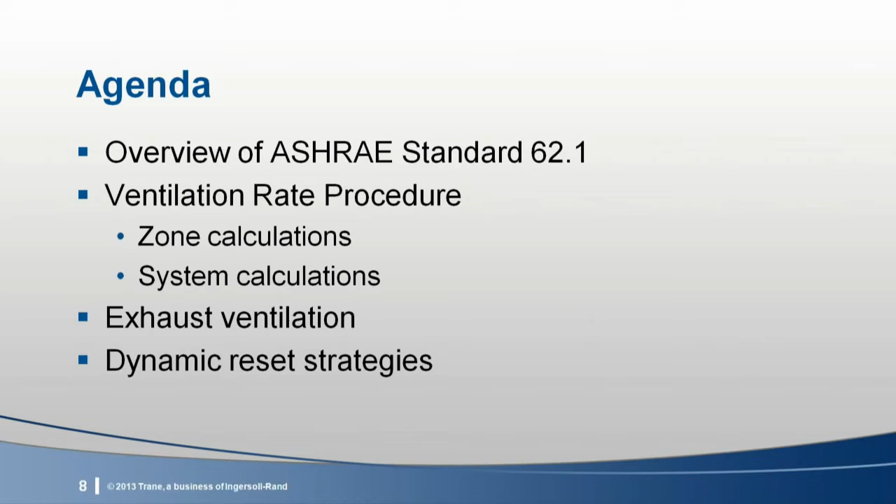During today's program, Trane Applications engineers Dennis Stanke, Paul Solberg, and John Murphy will take us through a discussion of the requirements of Standard 62.1, with specific focus on the ventilation rate procedure for calculating ventilation requirements. Dennis, who is a longtime member and recent chair of the Standard 62 Committee, will start us off with an overview of this standard. Then the guys will step us through how to use the ventilation rate procedure to determine the ventilation requirement for each zone and how much outdoor air must be brought in at the system level intake. And later, Paul and Dennis will touch on exhaust requirements and discuss various dynamic reset strategies for saving energy required to condition this ventilation air.

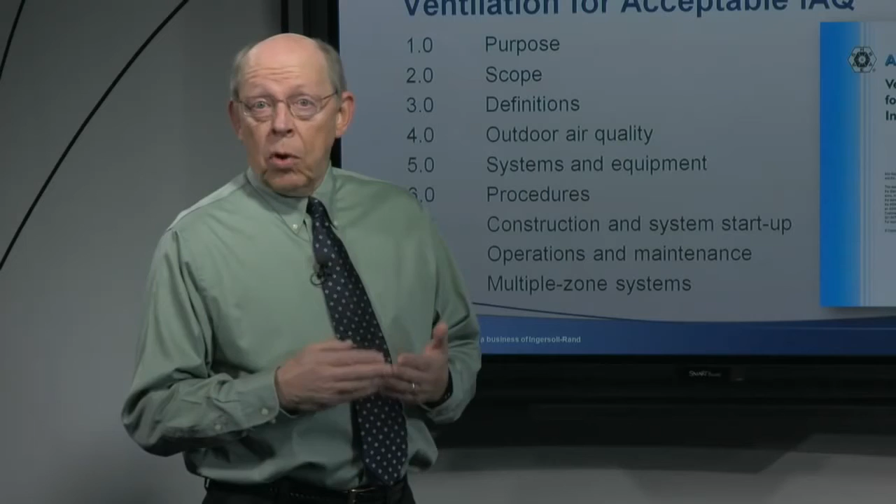Anyway, today I'm going to give you a quick overview of the 2010 version of Standard 62.1. It's a mandatory language ASHRAE design standard with the purpose of specifying minimum ventilation rates which will provide acceptable indoor air quality and minimize adverse health effects. It applies to commercial, institutional, and high-rise residential buildings, but not to healthcare.

Its requirements are organized in sections as follows: outdoor air quality assessment in Section 4, provisions for systems and equipment in Section 5, ventilation rates and calculation procedures in Section 6, construction and startup requirements in Section 7, and finally, operation and maintenance requirements in Section 8.

Normative Appendix A, which expands on Section 6 requirements, is also part of the standard. The standard is written in mandatory language so that it can be easily adopted by codes and can be used as a solid technical reference document for other standards, for energy labels, and for building rating systems.

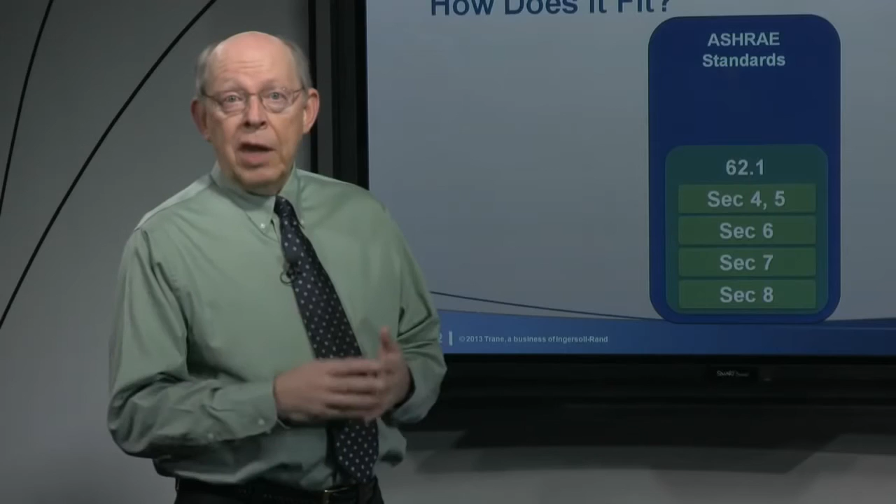This diagram attempts to show how the standard fits. First, here's Standard 62 broken down by section. Traditionally, Section 6 is most important for the model mechanical codes and many local building codes. Its ventilation rates and procedures appear in over 11,000 code jurisdictions.

To comply with ASHRAE Standard 189.1, the High Performance Building Standard, building designs must meet virtually all Standard 62 requirements. And the International Green Construction Code allows Standard 189.1 as a project compliance option. Projects following this option include all Standard 62 requirements referenced in the Standard 189.1 document.

Some building owners want to pursue a building energy label, like Energy Star or the ASHRAE Building Energy Quotient label. To comply with the Energy Star, all 62 requirements must be met. And since the ASHRAE BEQ label requires Energy Star compliance, again, all 62 requirements must be met.

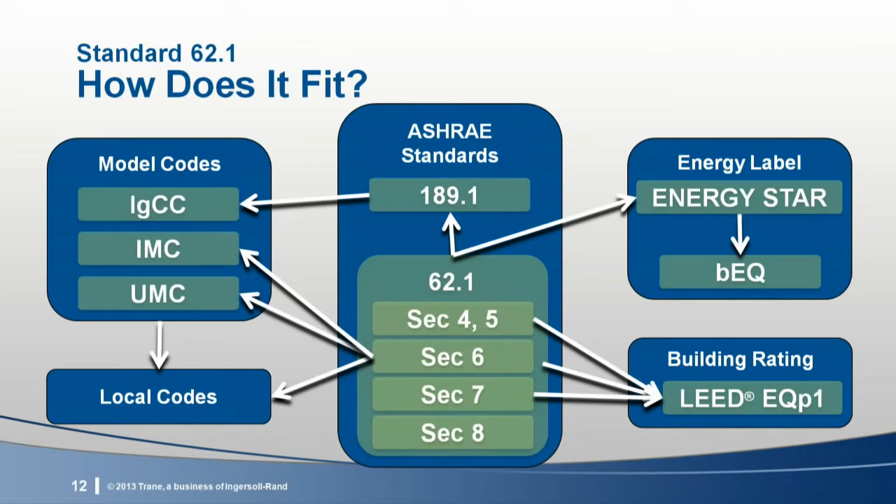And of course, many building projects these days seek LEED certification. The first LEED indoor environmental quality prerequisite requires compliance with the provisions in sections 4 through 7 of Standard 62.1. So you can see this ventilation standard provides the basis for building codes, energy labels, and building rating systems.

Okay, back to the standard to give you that quick overview that I promised.

Section 4 addresses outdoor air quality. It requires designers to consider potential outdoor contaminants both in the region and immediate vicinity of the building site. Section 5 covers a broad range of requirements for ventilation systems and equipment. When met, these requirements should help establish a baseline for building contaminant emissions so that the prescribed ventilation rates

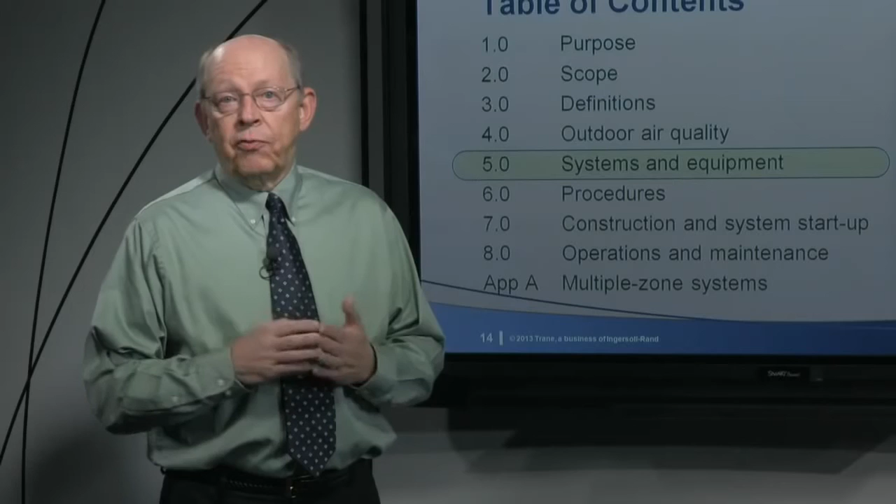and procedures in Section 6 can actually be expected to work. These sections cover a lot of ground, so we've included them in the supplemental material since we want to focus on Section 6 today. Turning now to the procedures for finding design ventilation requirements in Section 6, the standard includes 3 alternative design procedures for finding minimum outdoor airflow rates: the ventilation rate procedure, the IAQ procedure, and the natural ventilation procedure. And it includes exhaust airflow requirements in a separate section because they apply regardless of the design procedure used to determine the minimum outdoor airflow rates.

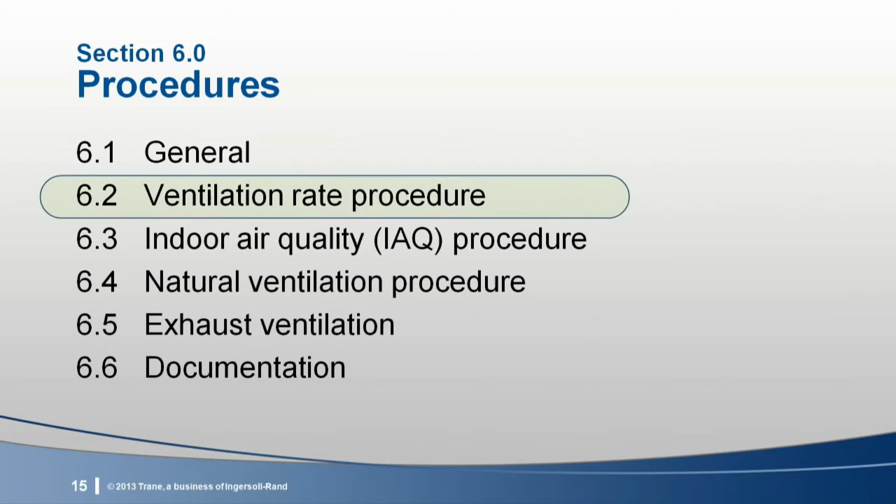The ventilation rate procedure is most widely used. It prescribes zone-level outdoor airflow rates in a table, and it prescribes equations and calculation procedures needed to find both zone and system-level rates. Most designers understand it and use it, and it's the basis for mechanical codes. Of course, it has a few tricky spots, so we'll go over an example a little bit later.

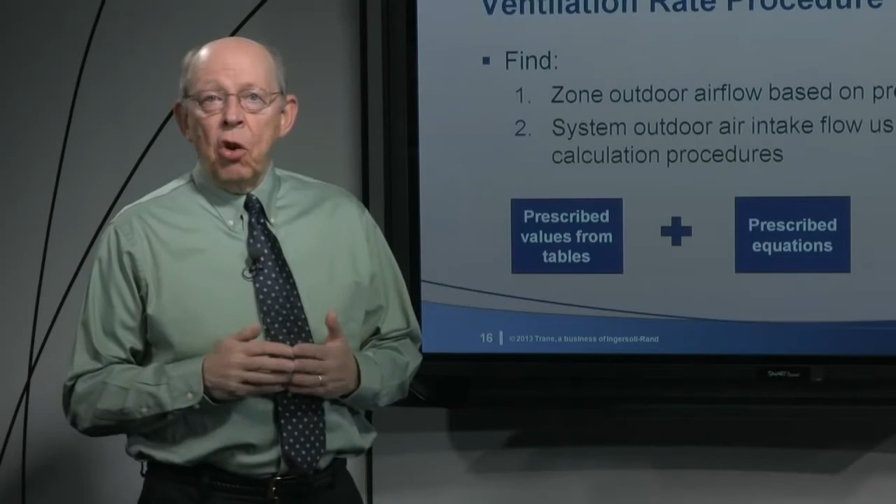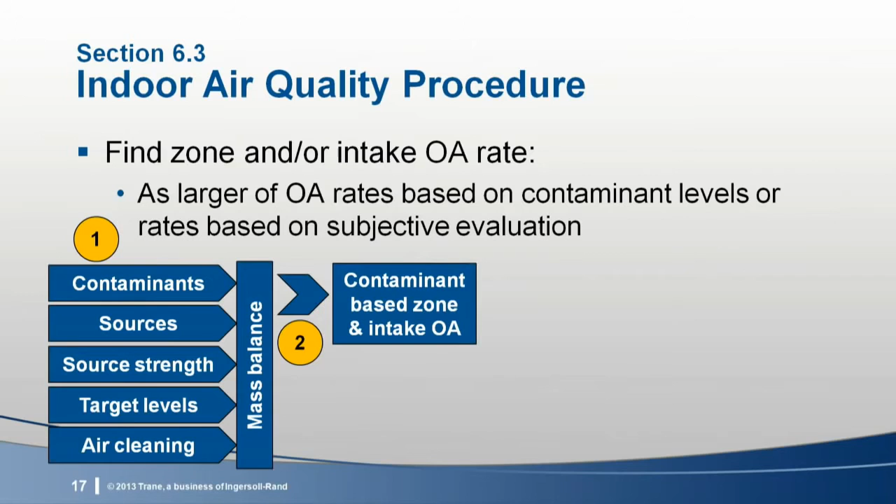Next is the indoor air quality procedure. Designers find minimum zone and system intake rates based on contaminant levels and subjective evaluation, proceeding as follows. First, identify all contaminants and mixtures of concern, sources and source strengths, and target contaminant and mixture concentrations. Second, use mass balance equations, accounting for any air cleaning devices, to find the zone and intake rates needed to

control contaminant levels to less than or equal to the target concentrations. Third, in the completed building, use a subjective evaluation in each zone to find zone and intake rates that satisfy occupants, or use the rates found by subjective evaluation in a substantially similar zone in an existing building. Finally, compare the zone and intake rates found using the mass balance approach to those found using the subjective evaluation approach, and use the larger of these rates.

Designers must perform both a mass balance analysis and a subjective evaluation to comply with the IAQ procedure. This requires a lot of work, a lot of judgment, and risk of variance from most code authorities. That's why very few one-of-a-kind building designers pursue it, why Standard 189.1 doesn't allow it, and why LEED has traditionally not allowed it. It's probably best suited for buildings with repeated identical designs, like retail chain stores.

I recently wrote an ASHRAE journal article about the IAQ procedure, showing in detail how it might be met. We included a reference to this article in the bibliography, but we're not discussing it in detail today.

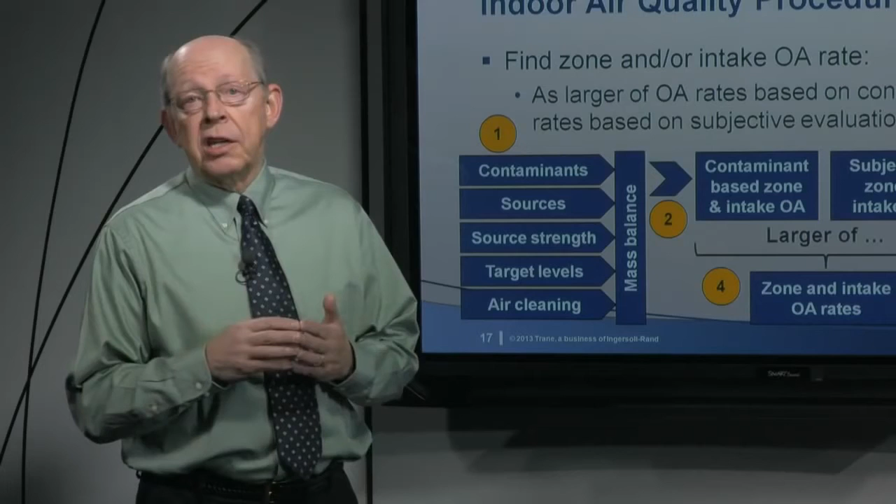Finally, the natural ventilation procedure provides for passive ventilation using only natural forces to move outdoor air through the zone. It requires that any natural ventilation system also include a mechanical system designed using either the ventilation rate procedure or the IAQ procedure. A mechanical system is needed to provide outdoor air during those times when the local openings must be closed.

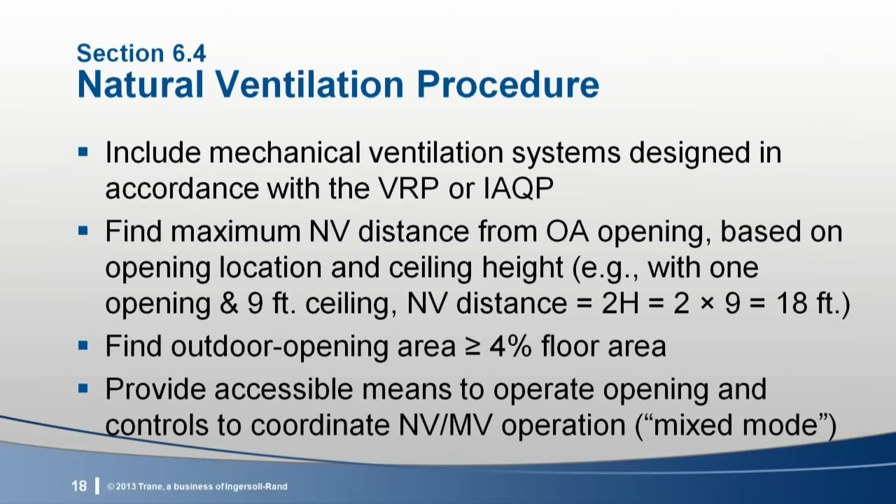To comply, first find how far outdoor air can be expected to penetrate into the occupied zone. This depends on the location of openings and the ceiling height. Next, find the area of the outdoor opening. It must be no less than 4% of the naturally ventilated floor area. Finally, provide readily accessible means for occupants to adjust the outdoor openings and provide controls to coordinate the operation of natural and mechanical ventilation systems.

Mixed mode ventilation is required because virtually all naturally ventilated buildings need mechanical ventilation at some point. For example, occupants may close local openings due to rain, wind, heat, cold, outdoor pollution, outdoor noise, and so on. As with the IAQ procedure, we're not discussing the natural ventilation procedure in any detail today.

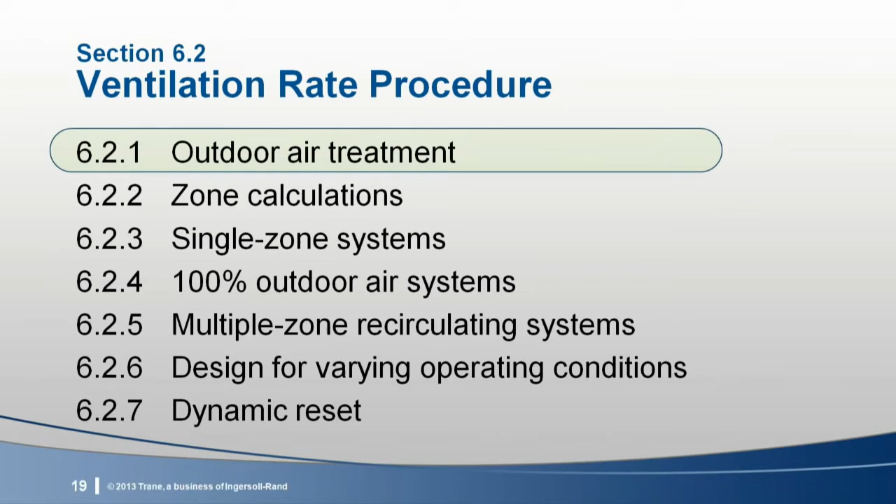Today, we're focused on the ventilation rate procedure. It covers outdoor air treatment, zone level and system level outdoor airflow calculations, an optional averaging approach to design for varying operating conditions, and an optional control approach to reset outdoor airflow dynamically.

Before we turn our attention to ventilation calculations, however, I want to briefly discuss outdoor air treatment. We use outdoor air to dilute and remove indoor contaminants. But since outdoor air itself can contain contaminants, in some geographical locations, the standard requires outdoor air cleaning between the intake and the occupied zone. The ventilation rate procedure requires filters in PM10 non-attainment areas, those areas where the concentration of particulate matter, 10 microns and smaller, exceeds the National Ambient Air Quality Standard.

Here's the latest EPA map for PM10 non-attainment areas. At least MERV 6 filters are required for buildings in all shaded locations shown in both yellow and red.

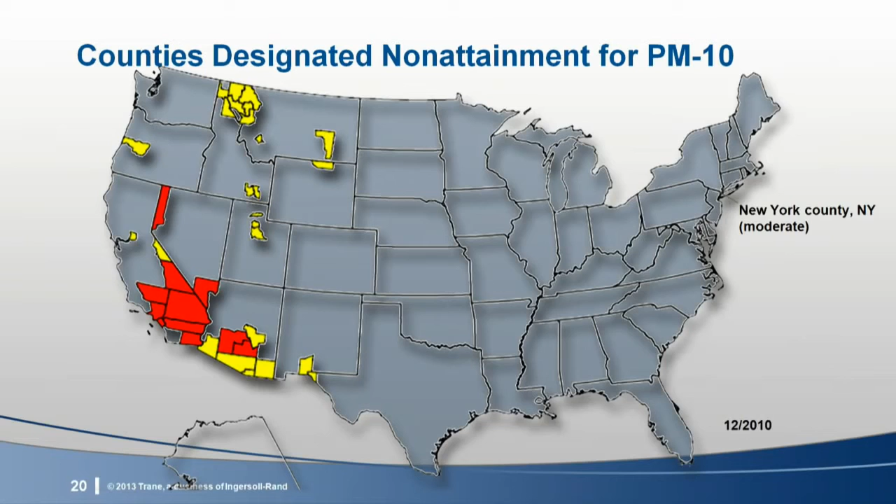This shouldn't be a big problem since the air handler probably has a cooling coil with a wet surface, and Section 5 already requires a MERV 6 filter upstream of any wet surface device.

At least MERV 11 filters are required for systems in the shaded locations. Air handler fans must be selected to provide the required airflow whether the filter is clean or dirty.

According to Appendix E, only buildings in Riverside, Kern, Los Angeles, and San Bernardino County in California need ozone air cleaners. But these designations change, so designers should check the EPA 8-hour ozone status for any planned building site.

Buildings located in ozone non-attainment areas other than Southern California don't need air cleaners to meet Standard 62, but designers might want to consider using them anyway.

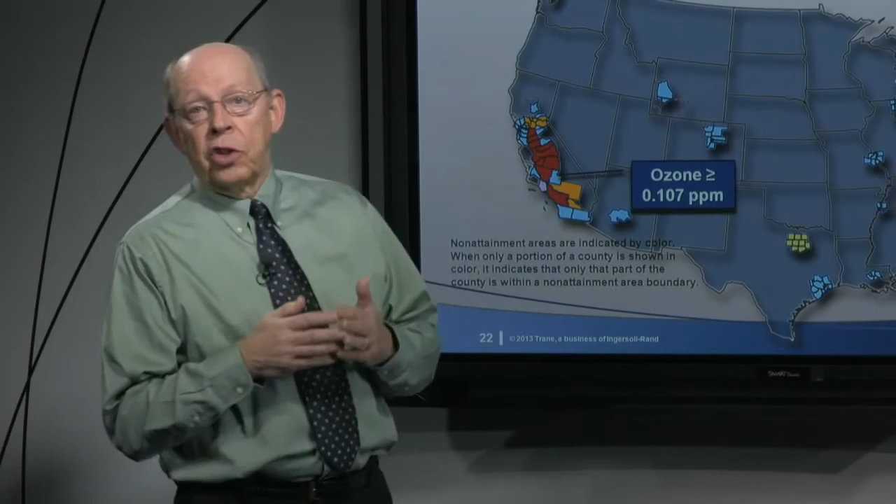After all, breathing ozone is harmful, and besides that, if you're designing a high-performance building, Standard 189.1 requires 40% efficient ozone air cleaners in all ozone non-attainment areas, which includes most of California and many major metropolitan areas throughout the U.S. As Dennis mentioned, we're only going to focus on the ventilation rate procedure for today's program.

This procedure includes both zone calculations and system calculations. First, the outdoor airflow needed in each ventilation zone must be determined based on prescribed rates listed in a table. Then, based on these zone calculations, the outdoor airflow needed at the intake for the entire system must be calculated, using procedures and equations defined in the standard.

Paul is going to start out by explaining the zone calculations. Standard 62 requires a three-step procedure to determine the outdoor airflow required for any occupiable space, which the standard calls a ventilation zone. I'll tell you about those 3 steps and then dive deeper into each one.

First, we calculate the volume flow of outdoor air, V sub BZ, that must be delivered to the breathing zone within an occupied space, using the prescribed rate in Table 6-1 of the standard.

Next, we determine the zone air distribution effectiveness, or how well the ventilation air mixes in the space, which depends on the location of the supply diffusers and return grills. The standard provides default values in Table 6-2 for different air delivery configurations.

Finally, we calculate the volume flow of outdoor air required for the zone by dividing the breathing zone outdoor airflow by the air distribution effectiveness.

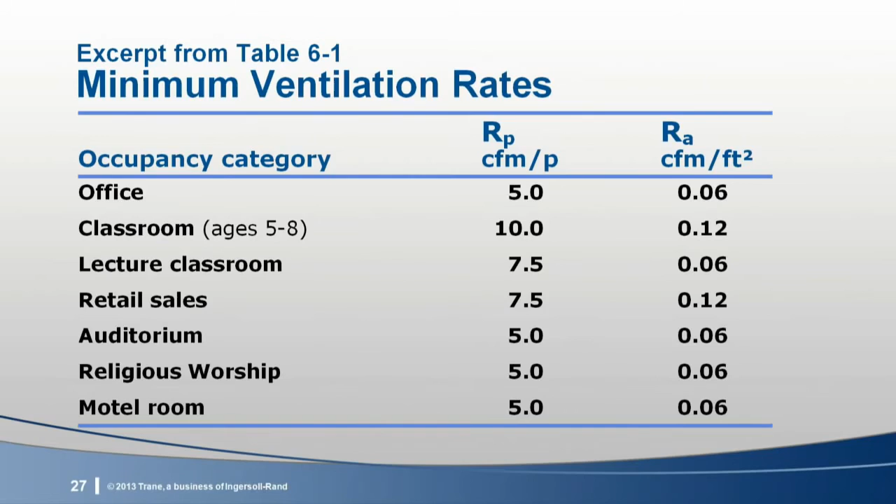Earlier versions of this standard prescribed only 1 ventilation rate for each category. This single rate accounted for the additive nature of odors and irritants, but did so behind the scenes. For example, the 1989 version of the standard required 20 CFM per person for offices. Behind the scenes, that was 15 CFM to dilute people-related odors and an additional 5 CFM to dilute building-related odors.

But these old CFM per person rates penalized high occupant density zones, like conference rooms or theaters and churches. By accounting for people-related and building-related sources separately, the new approach, which some call additivity, results in lower ventilation rates for high-density spaces. Now back to our 3 steps necessary to determine the volume flow of outdoor air for a zone.

Let's exercise the first of these 3 steps for zone calculations by using a simple example. In step 1, we determine the occupancy category for the zone using Table 6-1 and identify the corresponding ventilation rates.

This includes 2 components. First, the people source outdoor airflow rate, called R sub P, quantified in terms of CFM per person. Second, the building source outdoor airflow rate, called R sub A, quantified in terms of CFM per square foot. Then we determine the peak population for the zone, P sub Z, and floor area, A sub Z, and solve this equation to find the required outdoor airflow for the breathing zone.

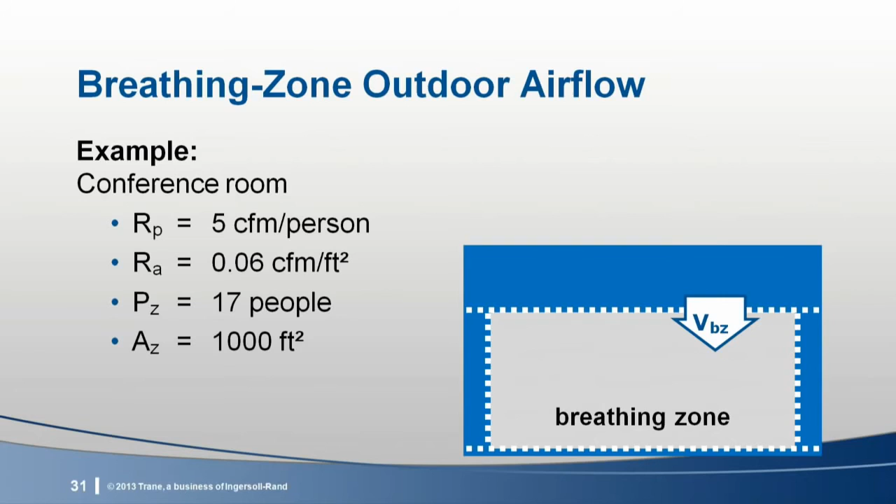Let's look at one example. Again, 1,000 square foot zone, but this time it's a conference room designed for 17 people. The Table 6-1 requirements are the same for a conference room as they are for an office in our previous example: 5 CFM per person plus 0.06 CFM per square foot.

When we solve the equation, predictably, the conference room needs the same 60 CFM outdoor air as the office space to dilute the building-related sources. But it needs 85 CFM to dilute the people-related sources due to the higher occupancy. In total, the conference room requires 145 CFM of outdoor air compared to 85 CFM for the office.

Okay, back to the three-step zone calculation process. Using the prescribed rates in Table 6-1, we just used equation number 1 to determine the volume flow of outdoor air that must be delivered to the breathing zone.

We now move to step 2, the determination of the effectiveness of the zone air distribution, E sub z, which is based on how the air is delivered to the space. E sub z helps the designer account for ventilation air that is delivered to the space by the diffusers, but bypasses the actual breathing zone.

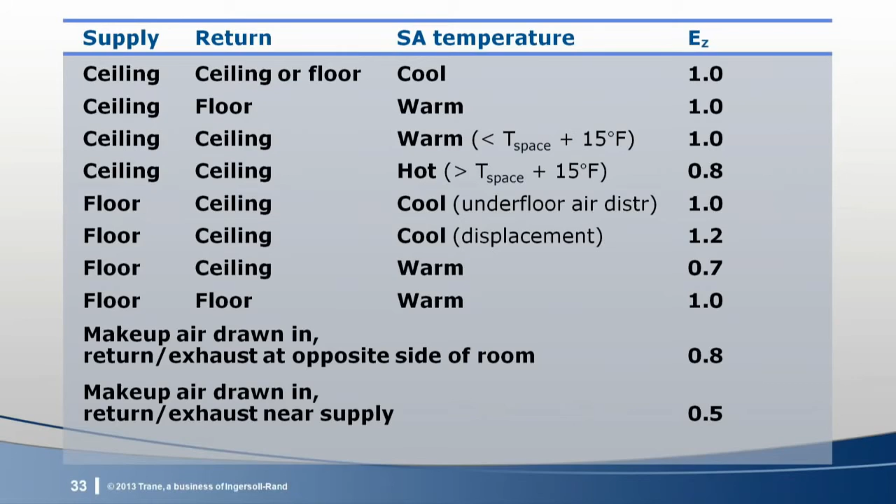During heating operation, it may be less than 1, since warm air tends to float above the breathing zone air or rise quickly through it. In either heating design, the air doesn't perfectly mix in the breathing zone, and therefore doesn't do a good job of diluting contaminants.

Now that we know both the volume flow of outdoor air to the breathing zone and the effectiveness of the air delivery system, we can calculate the volume flow of air that must be delivered to the space. V sub OZ is simply the required flow to the breathing zone divided by the effectiveness of its delivery. Going back to our office example, the outdoor airflow that must be delivered to the breathing zone is 85 CFM.

During the cooling mode, cool air enters the space through the overhead diffusers and returns through grills in the ceiling. From Table 6-2, we find the zone air distribution effectiveness to be 1. This means that delivering cool air from overhead diffusers is 100% effective at getting the outdoor air into the actual breathing zone. So solving the equation, we find that 85 CFM of outdoor air must be delivered to the diffusers so that 85 CFM makes it into the breathing zone. No air bypasses in this mode.

But what about during heating mode? If hot air enters the space through the same overhead diffusers and exits from overhead grills, Table 6-2 indicates that the zone air distribution effectiveness is only 0.8. When supplied and returned overhead, the buoyancy of this hot air will tend to cause some of the air to bypass from the diffusers to the ceiling-mounted return grills. So this system configuration is less than 100% effective at delivering outdoor air from the diffusers to the breathing zones. In the heating mode, we find that 106 CFM of outdoor air must be delivered to the overhead diffusers so that 85 CFM makes it into the breathing zone in this office.

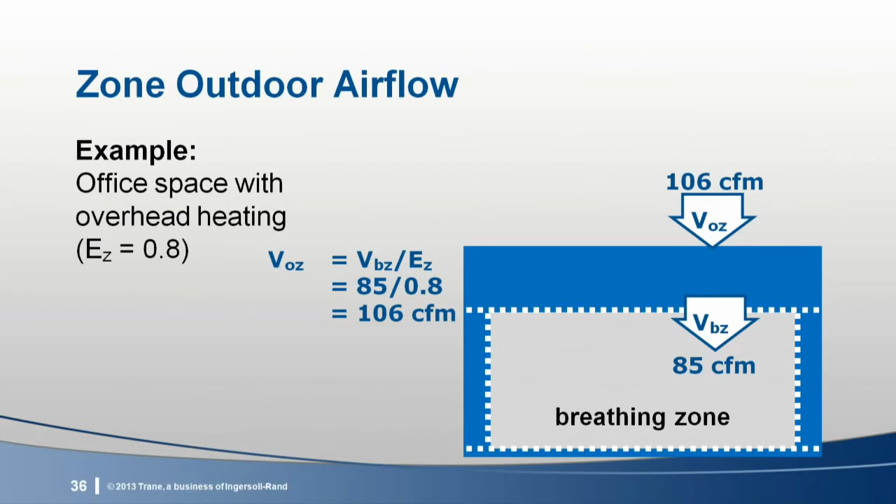In this mode, 21 CFM of outdoor air bypasses the breathing zone altogether. This next slide compares the various methods of distributing air to the zone and how the default values for air distribution effectiveness impact zone outdoor airflows for our office example.

First, notice that E sub z for most common configurations is 1. Two configurations that have an effectiveness less than 1 are when hot air is delivered through ceiling-mounted diffusers and it also returns from the ceiling, or when warm air is delivered through diffusers in or near the floor and it returns from the ceiling.

However, notice that if you design the system so that the supply air temperature during heating is less than 15 degrees above the space temperature, and if the diffusers are selected to achieve suitable velocities, you can achieve an air distribution effectiveness of 1, even with overhead heating. This should be the design goal.

The only configuration that has an effectiveness greater than 1 is when you deliver cool air using true displacement ventilation.

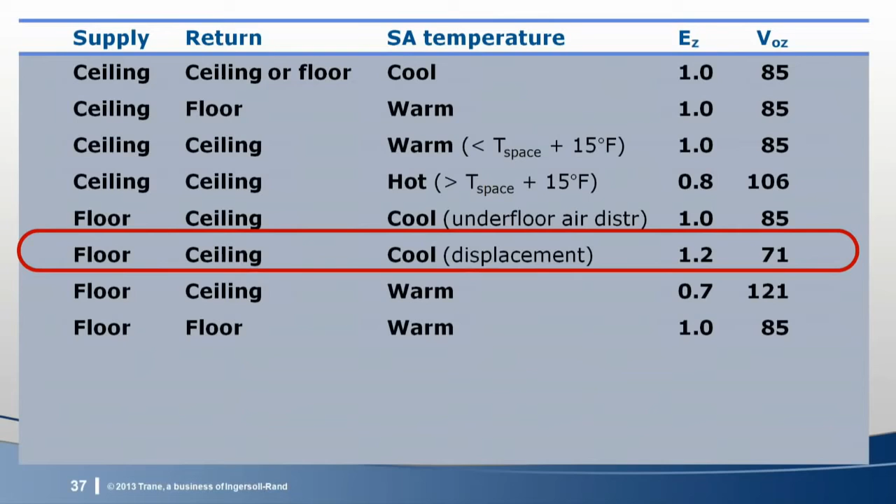Finally, these last two configurations were added to address systems where the outdoor air is drawn into the room. A common example is a hotel in which the outdoor air is delivered to the corridor and then drawn into the individual guest rooms underneath the door.

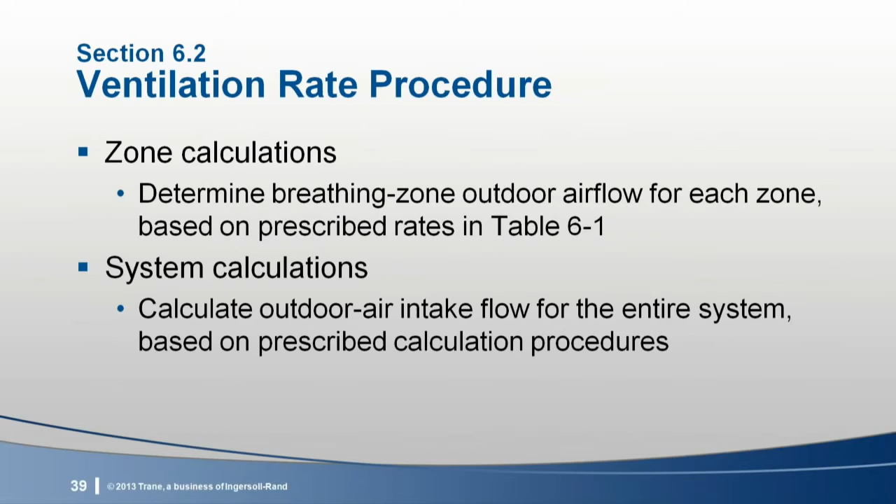So that covers the zone calculations of the ventilation rate procedure. Next, John will explain the system calculations. This involves calculating the outdoor airflow needed at the intake for the entire system and builds on the zone calculations we just reviewed.

John: The ventilation rate procedure of Standard 62 defines 3 ventilation system configurations: single zone, 100% outdoor air, and multiple zone recirculating systems. The procedure for calculating the system-level outdoor air intake flow differs for each of the configurations. But in each case, the system calculations build on the same zone calculations that Paul just explained.

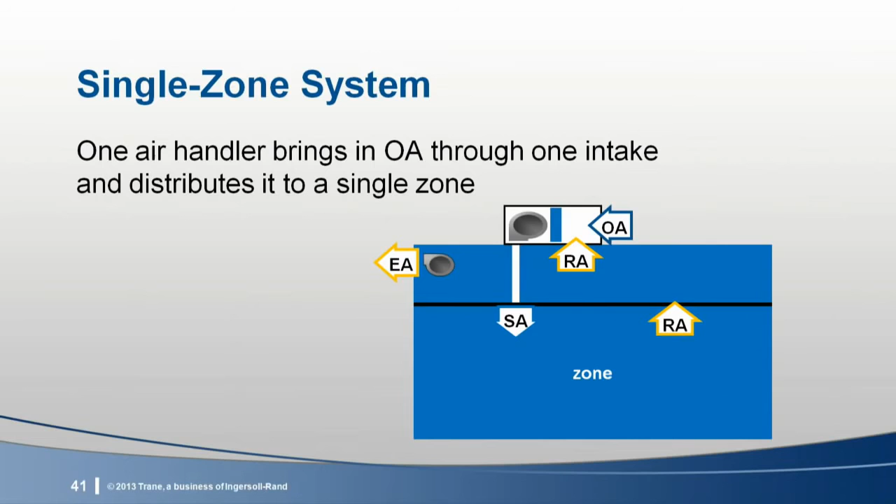In a single zone system, one air handler serves the ventilation needs of one zone. All the outdoor air that enters through the intake is delivered to that single zone. Any recirculated air is merely return air from that same zone. Some examples of single zone systems include packaged terminal air conditioners, classroom unit ventilators, or small packaged rooftops.

In a 100% or dedicated outdoor air system, one air handler serves the ventilation needs of more than one zone. Outdoor air enters through the intake and is then delivered to the zones without mixing it with any recirculated air. That is, the dedicated outdoor air unit delivers only outdoor air, not a mixture of outdoor air and recirculated air. Local units then handle the cooling or heating loads within each zone. These local units are typically fan coils, water source heat pumps, small DX split systems, or VRF terminals. Or they might be small rooftop units, chilled beams, or even radiant ceiling panels.

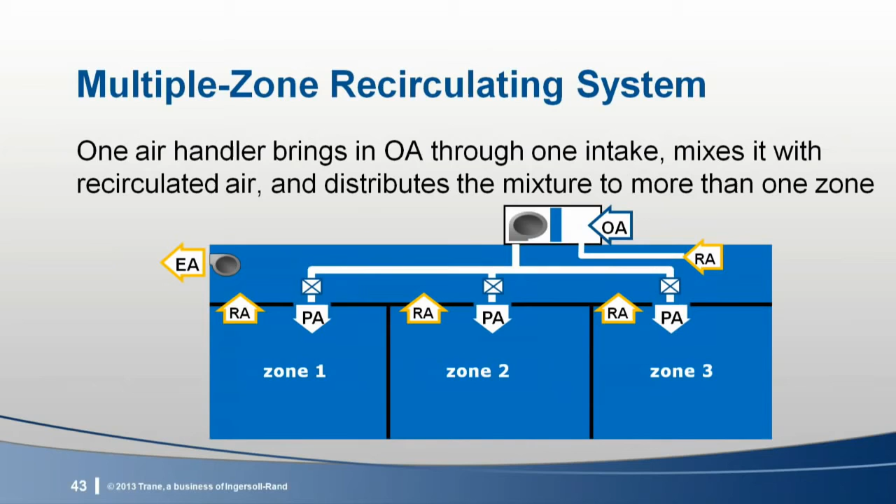In a multiple zone recirculating system, one air handler serves the ventilation needs of more than one zone. But in this case, after the outdoor air enters through the intake, it mixes with recirculated air before being delivered to the zones. The most common example is a conventional multiple zone VAV system. Also, for some applications, active chilled beams may require primary airflow that is greater than the minimum ventilation requirement. In that case, if they recirculate air, they are also multiple zone recirculating systems.

To demonstrate the procedures for calculating system level intake flow, we'll use this very simple 3-zone example. As I mentioned, for each of the 3 configurations, the system calculations build off of the exact same zone calculations. So for our example, the zone outdoor airflows have already been calculated to be 300 CFM for zone 1, 400 CFM for zone 2, and 500 CFM for zone 3.

We'll demonstrate the system calculations assuming operation in cooling mode, so zone air distribution effectiveness is equal to 1 in each zone. But I will mention how the results might change in the heating mode later on.

Now, starting with a single zone system. Since all the outdoor air enters through a single intake and is then delivered to one zone, this calculation is pretty easy. For our example, we're assuming that a separate rooftop unit serves each of the 3 zones. According to Standard 62, the required system intake flow, V sub OT, is equal to the corresponding zone outdoor airflow, V sub OZ.

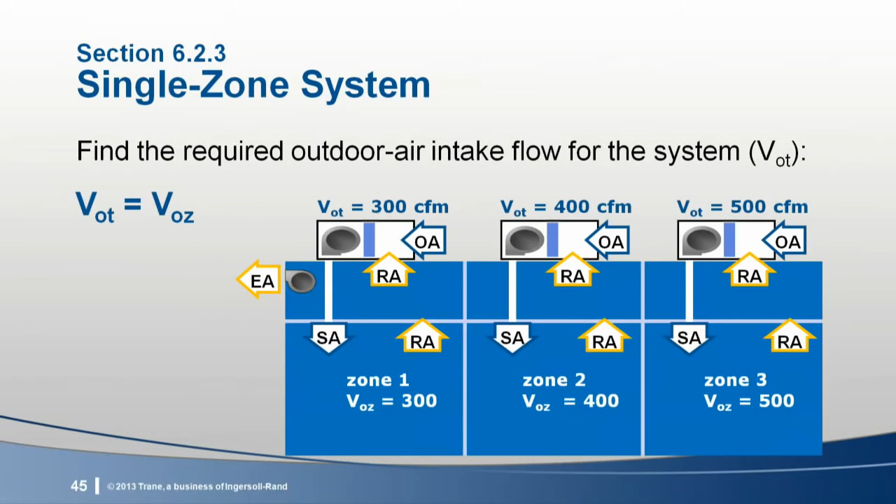So V sub OT equals 300 CFM in the cooling mode for the system serving zone 1, 400 CFM for the rooftop serving zone 2, and 500 CFM for zone 3.

Note that if E sub Z is less than 1 during heating mode, the system intake in a single zone system may need to be higher.

Now let's move on to the 100% outdoor air system. For our example, we're assuming that a dedicated outdoor air unit delivers conditioned outdoor air directly to all 3 zones, and a fan coil in each zone provides heating or cooling.

In this case, since the ventilation system delivers only outdoor air and no recirculated air, the required system intake flow, V sub OT, is simply the sum of the zone outdoor air flows. So for our example, the intake for this dedicated outdoor air unit needs to be 1200 CFM, or 300 plus 400 plus 500.

Now for the multiple zone recirculating system, which is more challenging. For our example, we're assuming that one VAV air handler serves all 3 zones, and each zone has a VAV box to vary the cooling or heating.

The primary air leaving the air handler is a mixture of outdoor air and air that has been recirculated from the zones. All zones receive the same fraction or percentage of outdoor air. As a result, while the critical zone, that is the zone that requires the highest percentage of outdoor air, is properly ventilated, the other zones served by the system are overventilated.

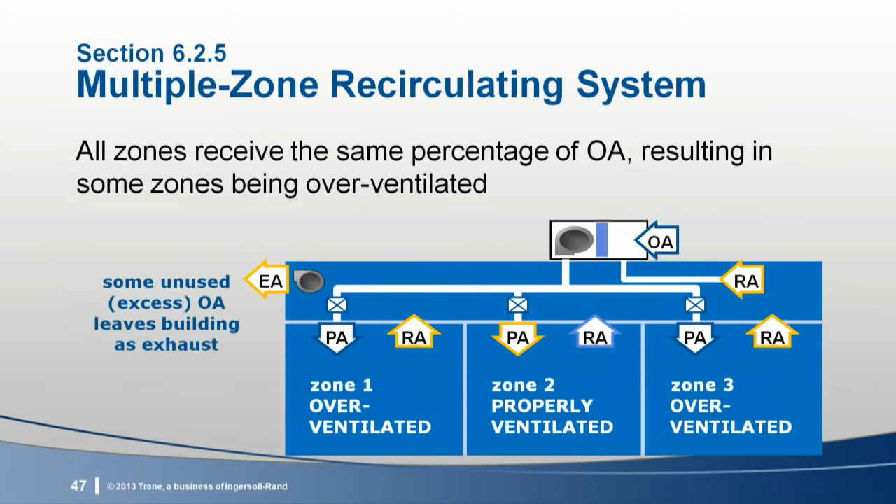In other words, some outdoor air enters the system intake, passes through these non-critical zones, then leaves the building without using up its full diluting potential. Some of the outdoor air brought into the system is wasted because of overventilation in non-critical zones.

To account for this, Standard 62 requires the designer to determine the system ventilation efficiency, or E sub V, in order to calculate the intake airflow for this type of system.

The ventilation rate procedure includes 2 methods for determining E sub V. You can either use the default value provided in Table 6-3, or you can calculate it using the procedures outlined in Appendix A of the standard.

The default approach is pretty simple, so it takes less time. However, the calculated approach is more accurate and often results in a higher efficiency and lower intake flow, so it may be worth the effort.

The first step is to calculate each zone's outdoor air fraction. Second, we find the uncorrected outdoor air intake, followed by the third step of determining the system ventilation efficiency. And finally, the fourth step, we calculate the required system outdoor air intake flow, V sub OT.

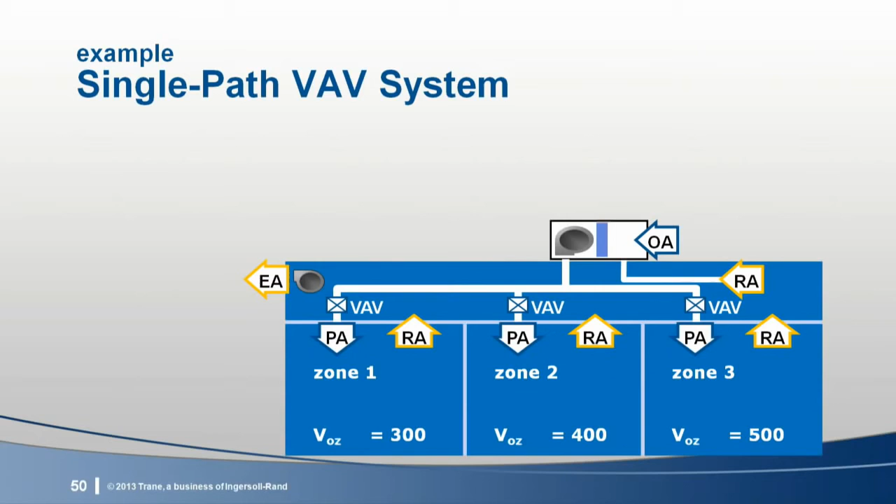This system includes a central air handler or rooftop unit that mixes outdoor air with recirculated air, and then delivers this primary air to individual single-duct VAV boxes. These boxes vary the airflow delivered to each zone.

As a precautionary note, we want to emphasize that this example is not intended to reflect a real-life system. Our purpose here is to demonstrate the calculation methods, so we tried to make the numbers simple rather than realistic. Your bibliography lists a series of articles that Dennis wrote for the ASHRAE Journal. They go through these calculation procedures in detail using a more realistic example.

So the first step is to calculate the fraction of outdoor air required in the primary air delivered to each zone. This is called the zone outdoor air fraction, or Z sub PZ. This is the ratio of zone outdoor airflow required to the primary airflow delivered to the zone. The larger the ratio, the richer the concentration of outdoor air required to meet the zone's ventilation demand.

In a VAV system, the primary airflow changes as the space load changes. So this fraction is higher when zone primary airflow is lower.

Standard 62 comments on this by stating that for VAV systems, you should use the lowest primary airflow that's expected to occur at the design condition being analyzed. The most conservative approach would be to use the minimum airflow setting of the VAV box, which results in the highest outdoor air fraction. But the standard allows you to use a higher airflow than this minimum setting, if that's what you expect in the zone at the design condition, and that would benefit by resulting in a lower fraction.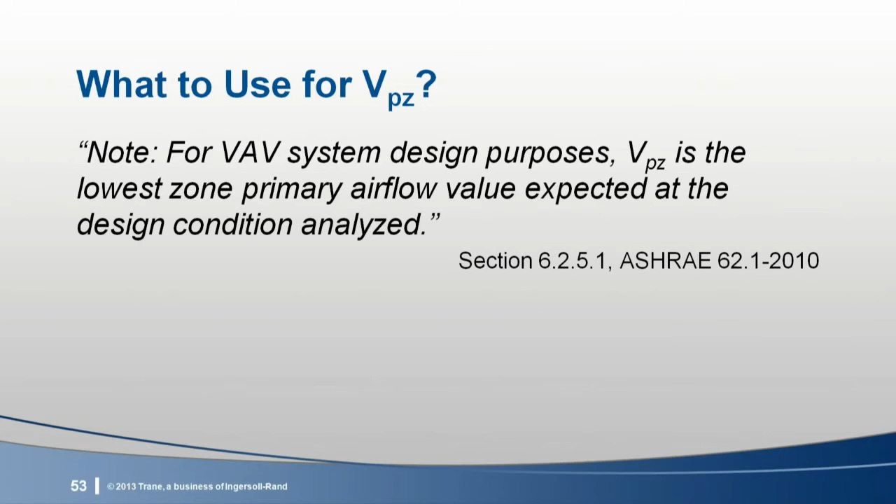Back in 2008, Dennis, Mick Schwedler, and Steve Taylor of Taylor Engineering presented an E&L broadcast that discussed how Standards 62 and 90.1 impact the design and control of VAV systems. On that broadcast, Steve shared his process for determining the minimum expected primary airflow when calculating a zone outdoor air fraction. We're not going to repeat that discussion today, but that E&L is listed in your bibliography and can be viewed online if you want to revisit that subject.

For the purpose of today's simple example, we'll just take the most conservative approach and use the minimum airflow setting of the VAV box. For Zone 1, the design primary airflow is 2,600 CFM, and the minimum primary airflow setting is 650 CFM. So the worst case outdoor air fraction from Zone 1 is 0.46, that's 300 CFM of outdoor air divided by 650 CFM of primary air. Solving for the other zones, we find that the outdoor air fractions vary from 0.46 to 0.5 for this example system.

With the zone outdoor air fractions calculated, the second step is to determine the uncorrected outdoor air intake. This is the system intake airflow that would be required if ventilation efficiency was 100%, and it's the amount of outdoor air that actually gets used in the breathing zones. Notice that this equation is basically the sum of the breathing zone rates that Paul described, with the exception of this factor D. The D stands for occupant diversity.

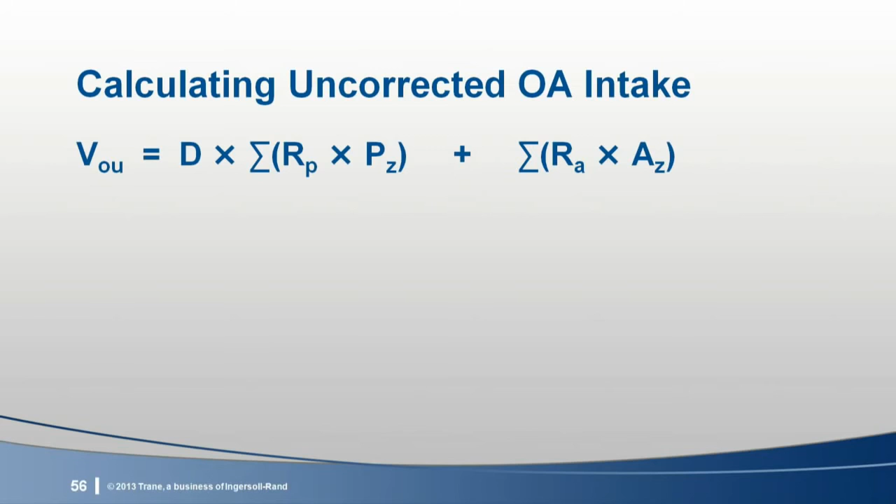For any system that serves multiple zones, we know that all zones won't usually be simultaneously occupied at their design populations. For example, if all the workspaces in an office building are fully occupied, the conference rooms will be empty. This diversity can be accounted for when designing the ventilation system. Mathematically, occupant diversity is the ratio of the expected peak system population divided by the sum of the peak populations in all the zones served by this system. Note that this diversity value is multiplied by only the CFM per person component of the ventilation rate, R sub P, not the CFM per square foot component.

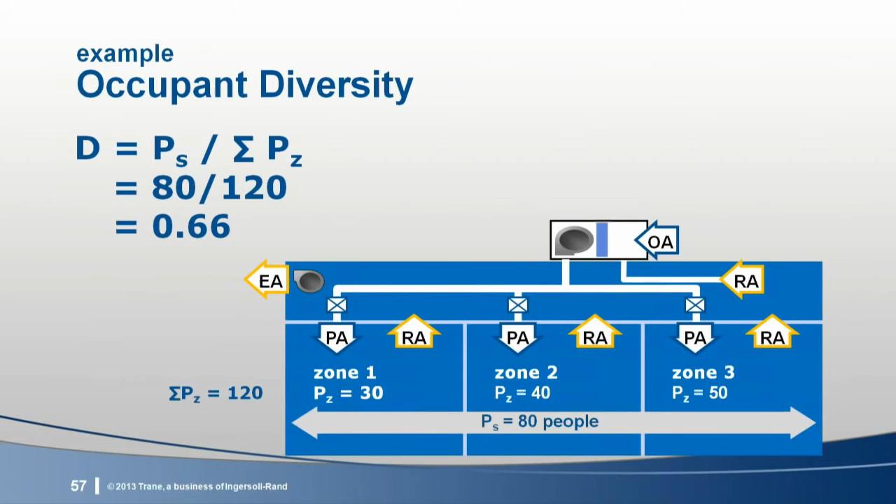So calculating occupant diversity for our example, the peak population for Zone 1 is 30 people, 40 people for Zone 2, and 50 people for Zone 3. So the sum of these peak zone populations is 120. Based on the expected peak population of 80 people for the overall building, the occupant diversity factor is 0.66.

With diversity calculated, next we'll sum the breathing zone rates. The people-related component of the breathing zone airflow is the CFM per person rate times the peak zone population. The sum of these three zones is 600 CFM, but again that portion is reduced by multiplying by occupant diversity. The building-related component is the CFM per square foot rate times the floor area. The sum for these three zones is also 600 CFM, but again this is not affected by occupant diversity. Adding these two components together, the uncorrected outdoor air intake is 1,000 CFM for our example.

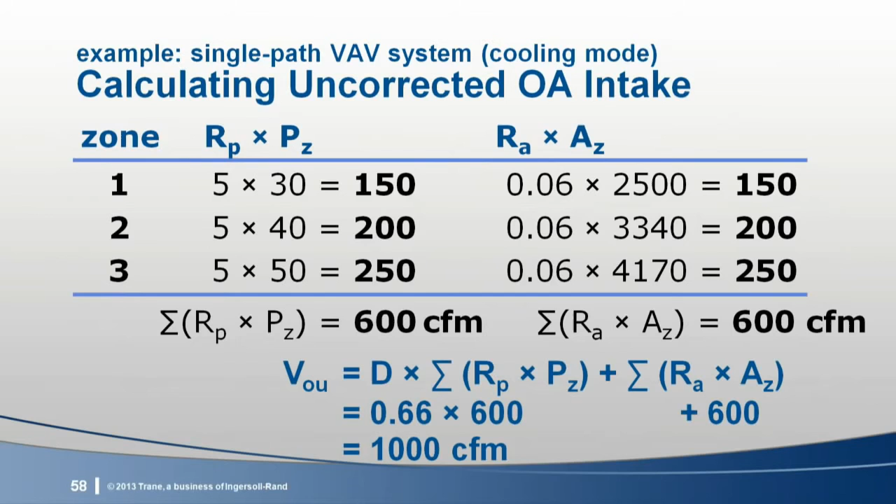So far we've calculated the zone fractions and the uncorrected intake. The third step is to determine the system ventilation efficiency. As I mentioned, you can either use the default value provided in Table 6-3 or calculate it using Appendix A. We'll start by walking through the calculation procedure from the appendix, then later we'll compare those results to the default method using this table.

Calculating system ventilation efficiency is a three-step process. First, we determine the average fraction of outdoor air in the system, or X sub S. This is the uncorrected outdoor air intake we just calculated, divided by the total system primary airflow. Then we calculate a ventilation efficiency for each zone. For systems with a single recirculation air path, calculating zone ventilation efficiency is fairly simple. For those systems with a secondary recirculation path, more assumptions and calculations are involved. But once the zone ventilation efficiencies are known, the final step of determining system ventilation efficiency is easy—it's simply equal to the smallest zone ventilation efficiency.

For step 3A, to calculate the average outdoor air fraction, we need to know the total system primary airflow, or V sub PS. Appendix A defines system primary airflow as the sum of the zone primary airflows. However, for a VAV system, the maximum airflow delivered by the supply fan, often called the block airflow, is less than the sum of the peak zone airflows because of load diversity. This block airflow can be obtained from load calculation software or by assuming some load diversity factor.

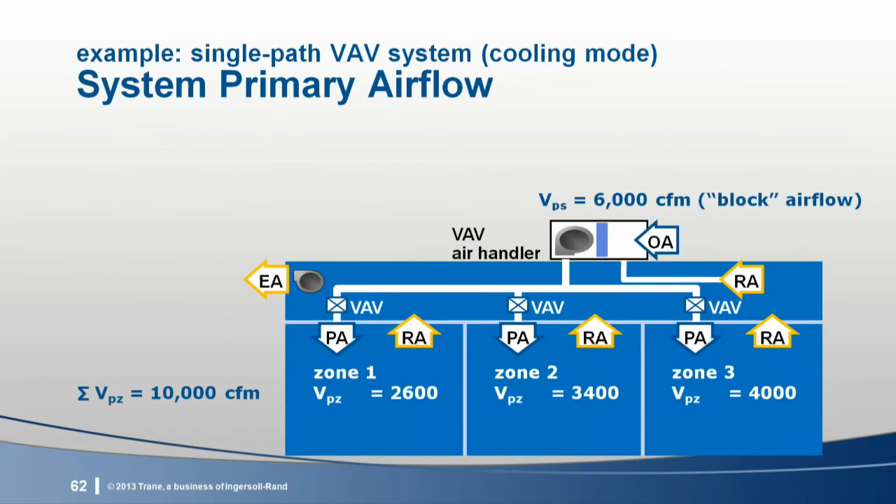However, the software also calculated the block airflow for the system to be only 6,000 CFM, again due to load diversity. To complete step 3A and find the average outdoor air fraction for the system, we divide the uncorrected intake, which we calculated to be 1,000 CFM, by the total primary airflow for the system, which is 6,000 CFM. So X sub S is equal to 0.17.

Step 3B is to calculate ventilation efficiency for each zone. This represents how efficiently the system delivers outdoor air from the system level intake to each individual breathing zone. As I mentioned, this calculation is simple for systems with a single recirculation air path, but more involved for systems with a secondary recirculation path.

Hey Dennis, can you give us some examples of systems that might use either of these two approaches?

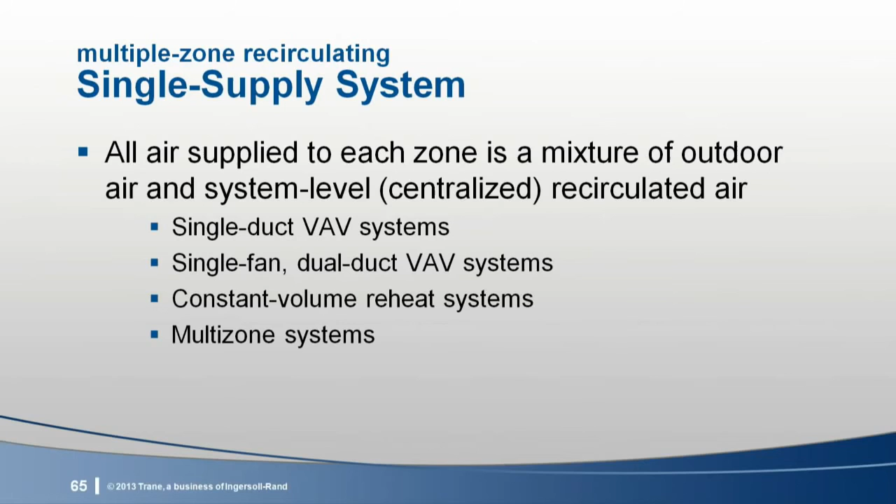Well, in a system with a single recirculation path, all the air supplied to each zone is a mixture of first pass outdoor air and system level recirculated air. No air recirculates locally. Single duct VAV systems are probably the most common example. In these systems, the VAV terminals include a primary airflow sensor, an air modulation damper, and possibly a heating coil. Other less common examples of single path recirculation systems are dual duct systems that use a single supply fan, constant volume reheat systems, and multi-zone systems.

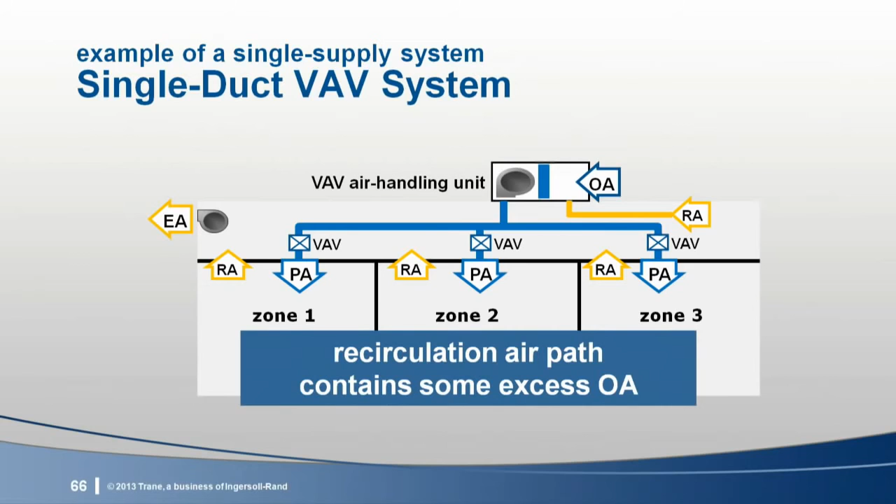The single duct VAV system that we're using for our example has a single recirculation air path. Again, all the air supplied to each zone is a mixture of outdoor air and centralized recirculated air. As John explained earlier, Standard 62 gives you credit for the unused or excess outdoor air that recirculates from non-critical zones.

In a system with a secondary recirculation path, some of the air supplied to each zone is recirculated from other zones without directly mixing with first pass outdoor air from the intake. For example, fan-powered VAV systems use VAV terminals that recirculate air from the ceiling plenum.

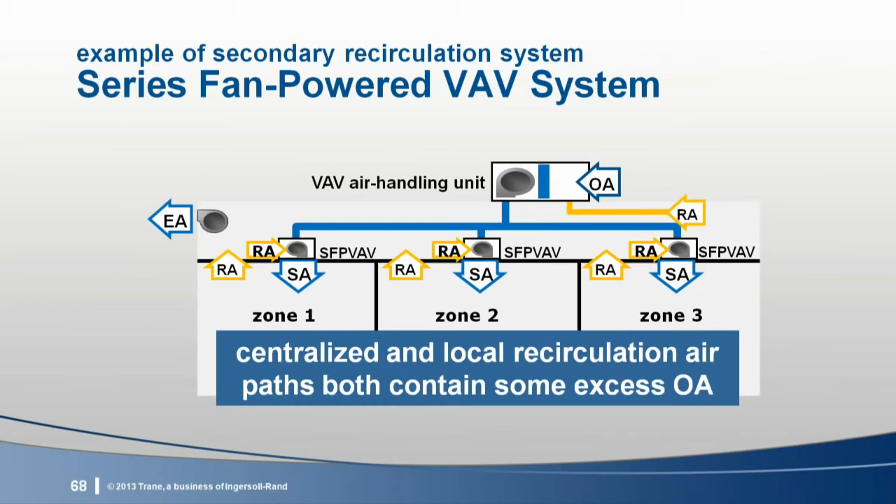And two-fan dual-duct VAV systems recirculate air from all zones through both the heating air handler and the cooling air handler. In a series fan-powered VAV system, one air handler brings in outdoor air at a central location and mixes it with air recirculated from all zones before delivering it as primary air to all zones. In addition, each VAV box recirculates air from the ceiling plenum, providing a secondary recirculation air path.

Standard 62 calculations result in a credit for excess unused outdoor air in the recirculated air, whether that recirculation occurs centrally or locally. In a dual fan, dual duct system, the cooling air handler brings in outdoor air at a central location and mixes it with recirculated air from all the zones before delivering it down the cold duct. The heating air handler conditions only recirculated air before delivering it down the hot duct. Both of these air streams contain some excess outdoor air that has been recirculated from overventilated zones.

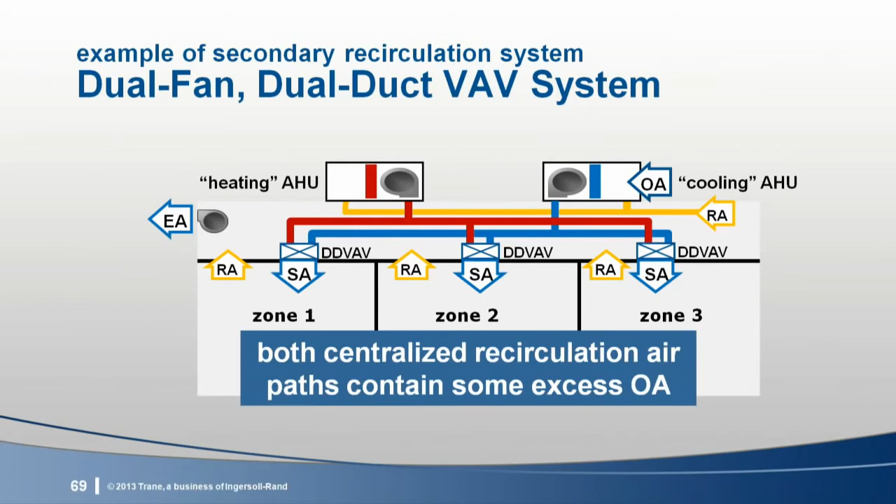So the calculations in Appendix A give you credit for this. Now, we're not taking time during today's program to walk through the steps for calculating zone ventilation efficiency for systems with more than one recirculation path. However, we did record that content, so you can review it at another time if you like. You can find it as supplemental material on the DVD or view it on demand at our website.

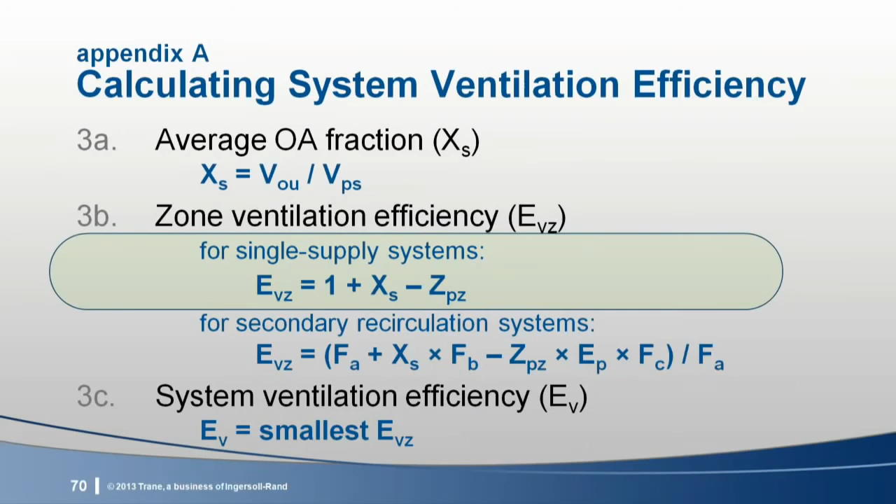Okay, getting back to our example. Step 3B for this system is easy because it only has a single recirculation path. So the equation for zone ventilation efficiency is 1 plus X sub S minus Z sub PZ. We just calculated X sub S to be 0.17, and we calculated Z sub PZ for each zone earlier. So solving this equation, we find that the zone ventilation efficiencies vary from 0.71 in zone 1 down to 0.67 in zone 3.

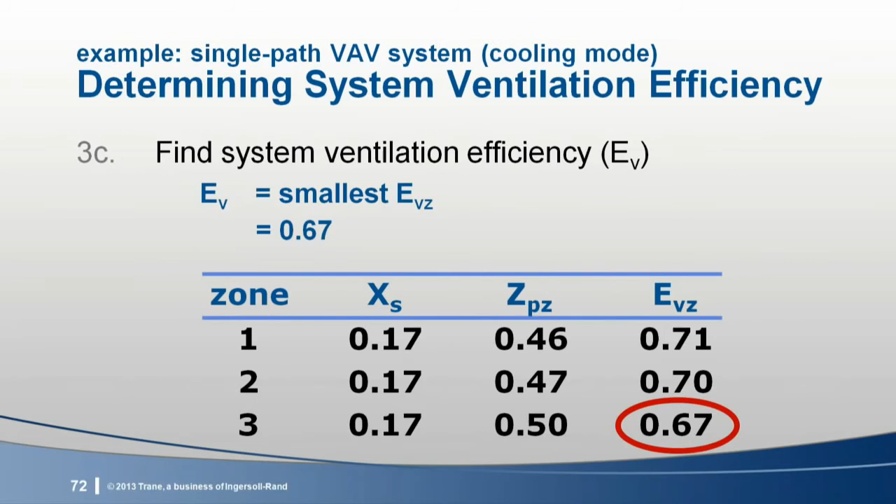Step 3C is to find system ventilation efficiency, which is simply the worst case or lowest zone ventilation efficiency. For our example, that's 0.67, the ventilation efficiency for zone 3.

Okay, we're almost there. Now, with system ventilation efficiency calculated, the final step, step 4, is to calculate the required system outdoor air intake flow, or V sub OT. This is calculated by dividing the uncorrected outdoor air intake, which we found earlier to be 1,000 CFM, by the system ventilation efficiency. So for our calculated efficiency of 0.67, the required outdoor air intake for our example system is 1,490 CFM.

That is, in order to deliver 500 CFM of outdoor air to zone 3, which is the critical zone, Standard 62 requires bringing in 1,490 CFM at the air handler. Zones 1 and 2 will be overventilated at this condition, receiving more outdoor air than the standard requires.

Now that we've calculated system ventilation efficiency and intake airflow using Appendix A, let's look at the default method using the lookup table in the standard. As I explained earlier, you can use either Table 6-3 or Appendix A to determine system ventilation efficiency.

Outside of Step 3, however, all the other steps are unchanged. Here's an excerpt from Table 6-3. It lists the default values for system ventilation efficiency based on the largest zone outdoor air fraction, Z sub PZ. For our 3-zone example, recall that the largest zone fraction was 0.5. By interpolating in this table, we find system ventilation efficiency to be 0.65.

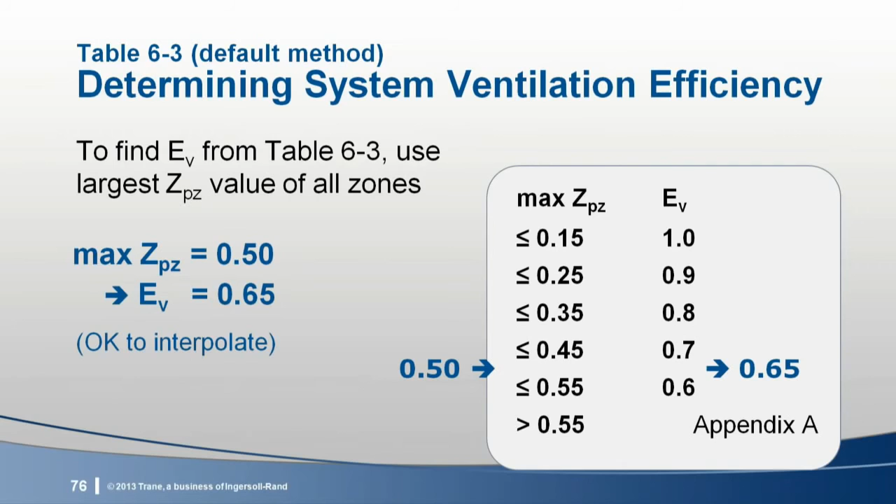Note that example 6-J in the Standard 62.1 User's Manual clarifies that interpolation is allowed when using this table, and it's worthwhile doing because it results in a higher value for system ventilation efficiency. But one important thing to notice about this table: if the largest zone outdoor air fraction is greater than 0.55, Standard 62 requires you to use the calculation method in Appendix A.

For our example, using the default value of 0.65 for system ventilation efficiency, the required outdoor air intake would be 1,540 CFM. So in this case, using the calculations in Appendix A resulted in a system intake airflow that is less than what would have been required if we used the default from the table.

Note that the default values in Table 6-3 assume an average outdoor air fraction, X sub S, of 0.15. So for systems with a higher average fraction, like our example, using Appendix A will result in a higher system ventilation efficiency and a lower intake airflow.

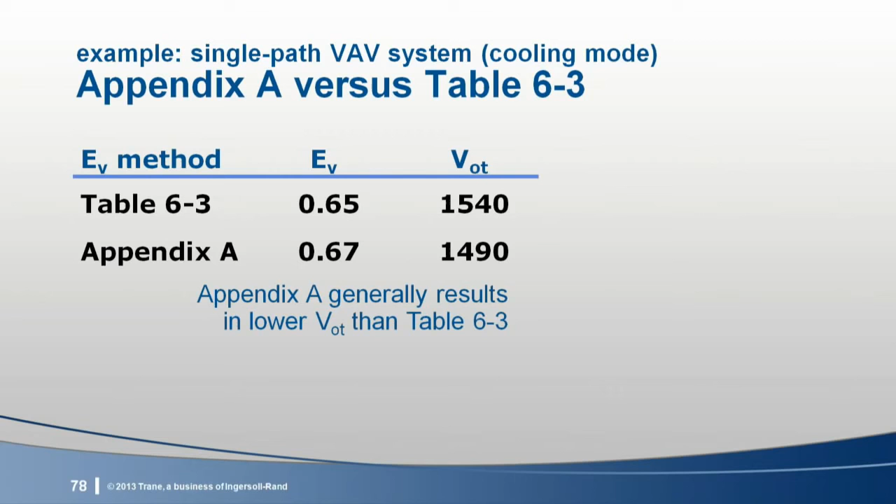I mentioned earlier that I would discuss the impact of heating mode versus cooling mode. As Paul explained, when delivering warm air to the zone, some configurations have a zone air distribution effectiveness less than 1. So we used our same example to see how an effectiveness of 0.8 would impact the system intake airflow.

An E sub z of 0.8 during the heating mode results in a higher zone outdoor airflow, and therefore a higher outdoor air fraction. In our example, the worst case fraction increases to 0.63 compared to 0.5 in the cooling mode. With this high fraction, Table 6-3 cannot be used.

So using Appendix A, we find that even though the zone outdoor fractions are higher, X sub S is also higher because the system primary airflow is lower. In our example, this results in a higher system ventilation efficiency and a lower intake airflow.

I calculated the outdoor air intake to be 1300 CFM during the heating mode, compared to 1490 CFM in the cooling mode. But it's really hard to generalize this for all applications, so it depends on what the system primary airflow is when the zones are in heating. And of course, if the system is designed so that zone air distribution effectiveness is 1 when heating, this comparison isn't even an issue.

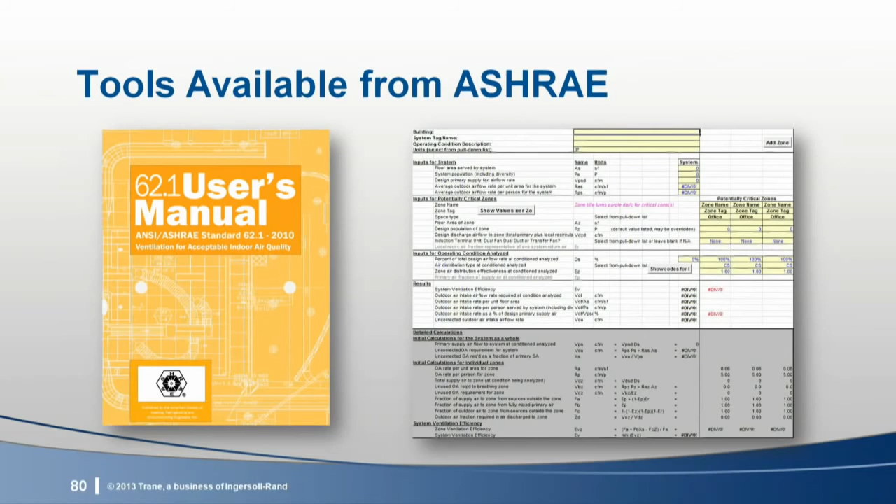In addition, the ventilation rate procedure calculations have been built into Trace 700. So if you use this tool for load calculations, you've already entered the zone level detail needed to calculate zone outdoor airflows. And with just a few more inputs, it can perform the system ventilation calculations too.

To wrap up this section on system calculations, let's compare the calculated intake airflows for all 3 system categories listed in the ventilation rate procedure. For our example 3-zone building, the individual single-zone systems deliver 300, 400, and 500 CFM respectively, for a total of 1200 CFM for the overall building. The 100% outdoor air system delivers 1200 CFM to the building also. And the single-path VAV system delivers 1490 CFM.

Although we did not go through it during the program, as Dennis mentioned, we did record a supplement during which we walked through the same example for a series fan-powered VAV system. As you can see, the impact of ASHRAE 62 giving credit for unused outdoor air in a secondary recirculation path can be significant, reducing the intake airflow in this example to 1180 CFM.

Now, it's worthwhile to point out that to compare the performance of these different ventilation systems, you need to focus your attention on the calculated intake airflows, V sub OT, not on system ventilation efficiency. The reason I say this is that many people erroneously think that a dedicated outdoor air system has 100% ventilation efficiency. Based on that, you would conclude that a dedicated outdoor system brings in 33% less outdoor air than the single-path VAV system, since its ventilation efficiency is 67%.

And 15% less than the series fan power system. But when you compare the calculated intake airflows, 1200 CFM versus 1490 for the single-path VAV, the difference is only 19% for this example, not 33%. An intake airflow for the series fan power VAV is actually a little less than for the dedicated outdoor system, not more. Why the difference? Well, it's because ventilation efficiency of a dedicated outdoor system is usually less than 100%, but it's just not necessary to calculate it as part of the ventilation rate procedure.

As defined by Standard 62, system ventilation efficiency is the sum of the outdoor airflows required in all the breathing zones, V sub OU, divided by the outdoor airflow that enters through the system level intake, V sub OT. For most dedicated outdoor air systems, the intake airflow is equal to the sum of the zone outdoor airflows, each of which is based on peak zone population, with no credit for system-wide population diversity. As a result, system intake airflow is based on all zones being at peak population simultaneously, even though that's typically not the case. So for our 3-zone example, the required outdoor air intake flow is 1200 CFM when using a dedicated outdoor air system. Remember that the uncorrected outdoor air intake for our example building was calculated to be 1000 CFM. Therefore, the ventilation efficiency for this dedicated outdoor air system is actually 83%.

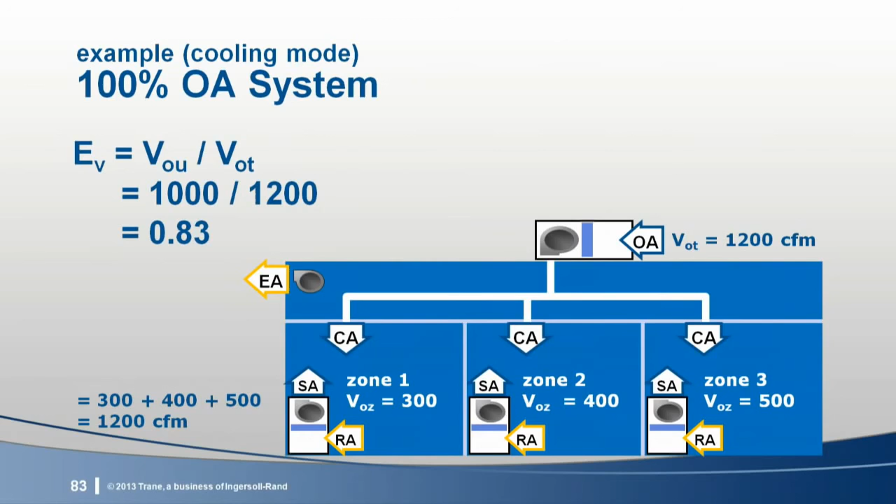While we're on this topic, what about single zone systems? When you just look at each system individually, system ventilation efficiency is 100%. But if you're comparing the use of 3 separate single zone systems to 100% outdoor air or a multiple zone system, you really should look at the overall building when making the comparison. For our 3-zone example, the total outdoor air intake flow for these 3 systems is 1200 CFM. Again, with an uncorrected outdoor air intake of 1000 CFM for this building, the combined system ventilation efficiency is 83% when using single zone systems.

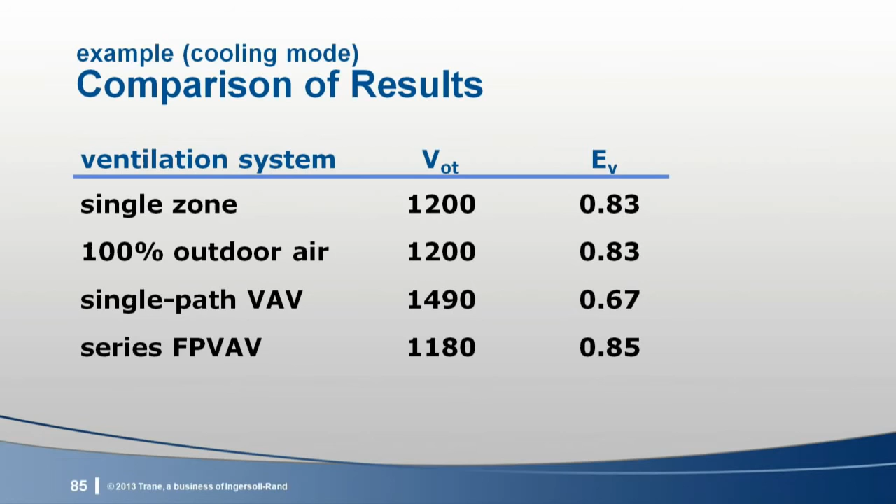So when comparing the performance of these different ventilation systems, you need to compare the calculated intake airflows, not system ventilation efficiency. Even though ventilation efficiency is typically not 100% for these other systems, it's not calculated as part of the ventilation rate procedure in ASHRAE 62. So that completes our step-by-step walkthrough of the ventilation rate procedure calculations when designing a system.

Before we move on to discuss how to control the system during operation, let's briefly discuss the exhaust system. Through a recent addendum, the exhaust airflow requirements were moved to a separate section, Section 6.5, since they apply regardless of the design procedure used. This is clarified in Section 6.1, which states that the exhaust requirements must be met regardless of whether the ventilation rate, IAQ, or natural ventilation procedure is used. This section contains a table that includes minimum exhaust rates for space types where specified contaminants are generated.

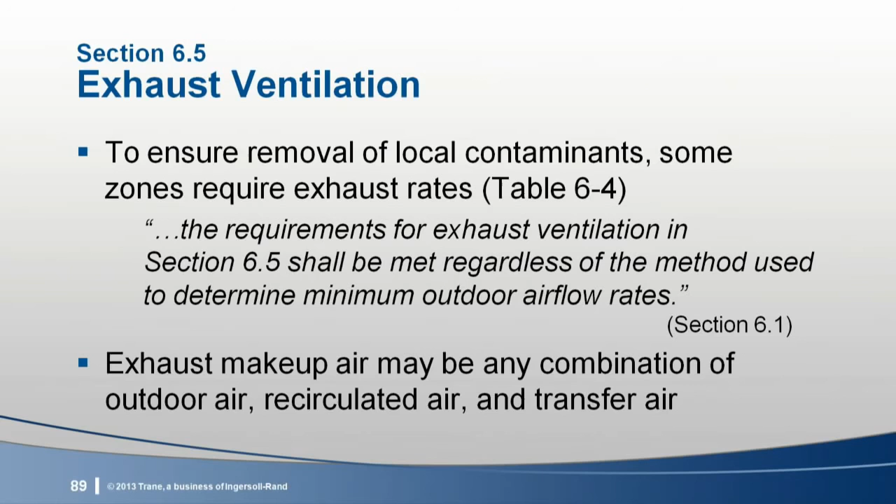Okay, let's turn the page now and talk about dynamic reset. Standard 62.1 explicitly permits dynamic reset of intake airflow as operating conditions change. While implementation details are sketchy, the dynamic reset option is clear. Any system control approach that responds to varying conditions is allowed, provided it supplies no less than the outdoor airflow currently required in the breathing zone. Although it doesn't require any specific approach be used, the standard describes 3 possible dynamic reset control options. Zone outdoor airflow may be reset in response to variations in zone population. This option is called demand control ventilation, and there are many different ways to do it.

System-level intake flow may be reset in response to variations in system ventilation efficiency due to changes in zone airflow. This option has been called ventilation reset control in the past, but Standard 90.1 calls it ventilation optimization control. Finally, the minimum primary airflow setting for VAV zones may be reset in response to variations in system intake airflow, which occur during economizer cooling operation.

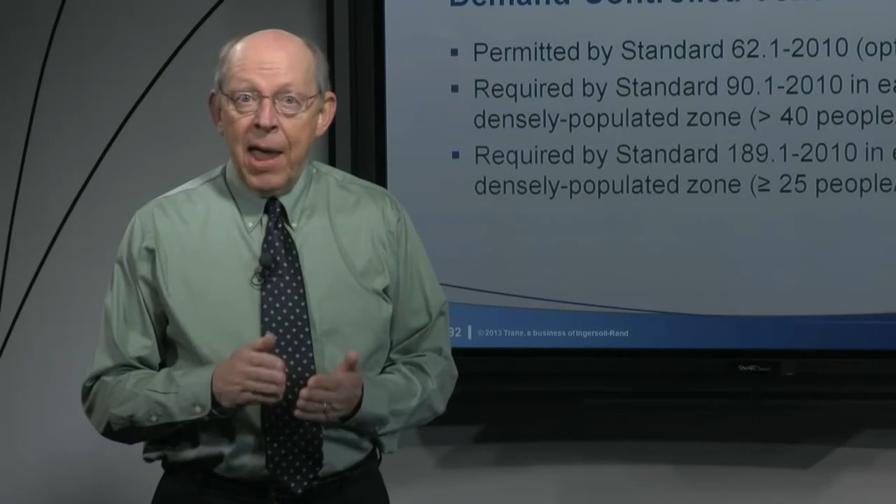The first dynamic reset approach we consider is demand control ventilation, which usually applies at the zone level. Standard 62 permits it in any zone, but Standard 90.1 currently requires it in zones with more than 40 people per 1,000 square feet. Standard 189.1 requires it in zones with 25 or more people per 1,000 square feet.

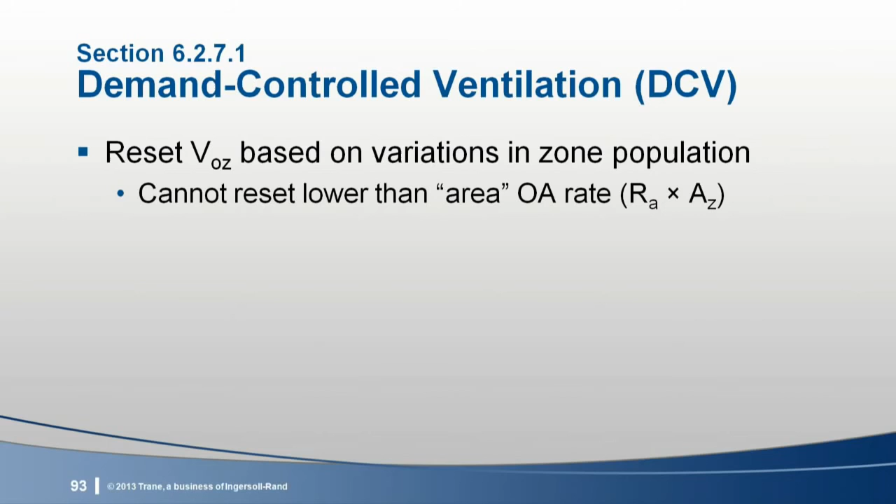When used, the zone level demand control option must meet some simple requirements. First, the controls can't reduce zone outdoor airflow to a value that's lower than the area outdoor air rate for the zone, regardless of the estimated population. Second, the controls must provide the minimum outdoor airflow calculated for the estimated zone population at steady state. This allows designers to ignore the dynamics associated with population variations and damper modulation.

Third, when the mechanical cooling system is dehumidifying, the intake airflow cannot be reduced to a level that's lower than the coincident exhaust airflow from the system. This requirement indirectly addresses building pressure. And finally, all assumptions must be documented, including a table showing minimum and maximum outdoor airflow for each zone.

Actually, to keep a building at positive pressure when cooling, you'd want the intake rate to be no less than the exhaust rate plus the exfiltration rate, even though the standard doesn't go into that kind of detail.

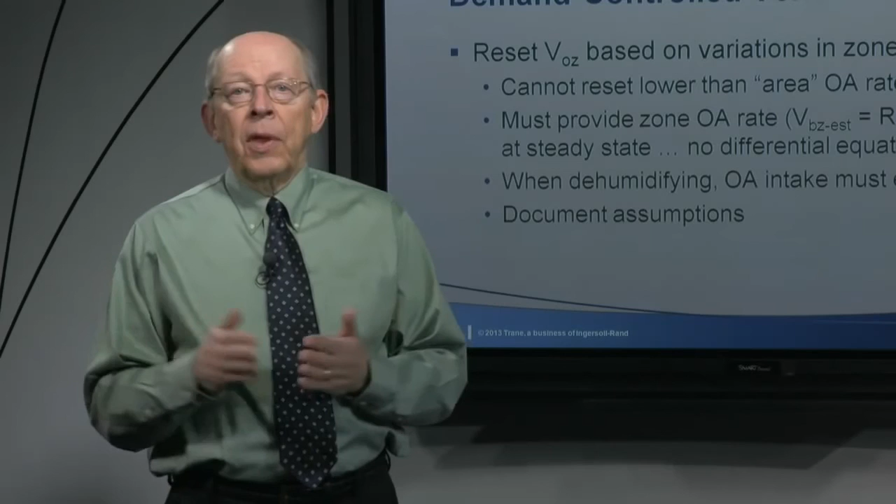But let's move on. Since outdoor air demand varies with population, one way to implement demand control ventilation involves estimating the current zone population. Current population can be estimated in several different ways. For instance, a time of day schedule in the building automation system could be used to estimate population at any given time. This approach is probably not very accurate, but it can work in zones where occupancy is more predictable, like classrooms or cafeterias or churches.

Simple binary occupancy sensors can estimate zone population too. A motion detector, for instance, could be used to indicate either design population or zero population. This all or nothing approach may or may not be such a good idea in some zones, but it can be used successfully in zones that are unoccupied periodically, like individual offices, small conference rooms, some classrooms, and so on.

Finally, people can actually be counted in some zones. For instance, theater ticket sales or store entry-exit turnstiles can be used to find a fairly accurate estimate of population. Other people counters are also available, but they are usually more expensive. The estimated breathing zone outdoor airflow currently needed can then be calculated using the estimated population.

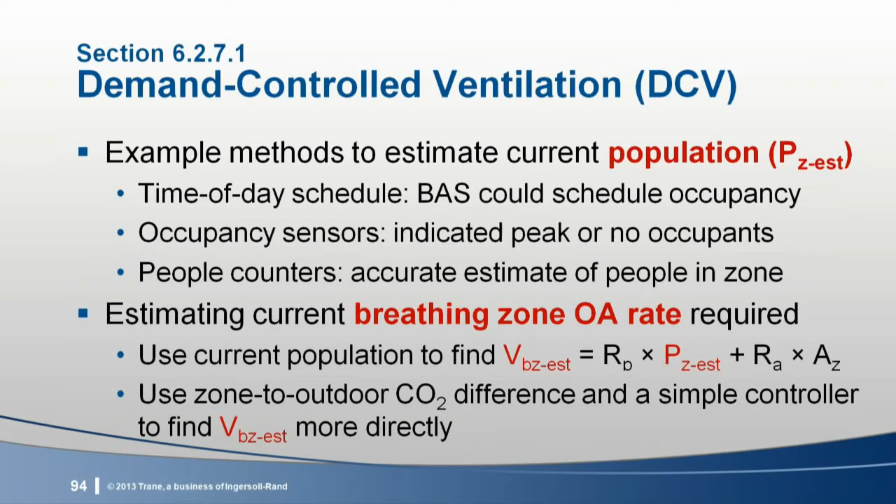Alternatively, the breathing zone rate can be estimated more directly using CO2 sensors and a simple controller. Since people produce CO2 at a predictable rate, the difference between indoor and outdoor CO2 level has been widely used to estimate ventilation rate per person. Combined with a simple controller, this difference can be used to estimate breathing zone outdoor airflow.

I'll show an example next, but first remember this: differential CO2 alone can't be used to find current zone population. To estimate population, you'd need to sense outdoor airflow as well as CO2 level, then solve a differential equation to find the current population. Most designers don't do that.

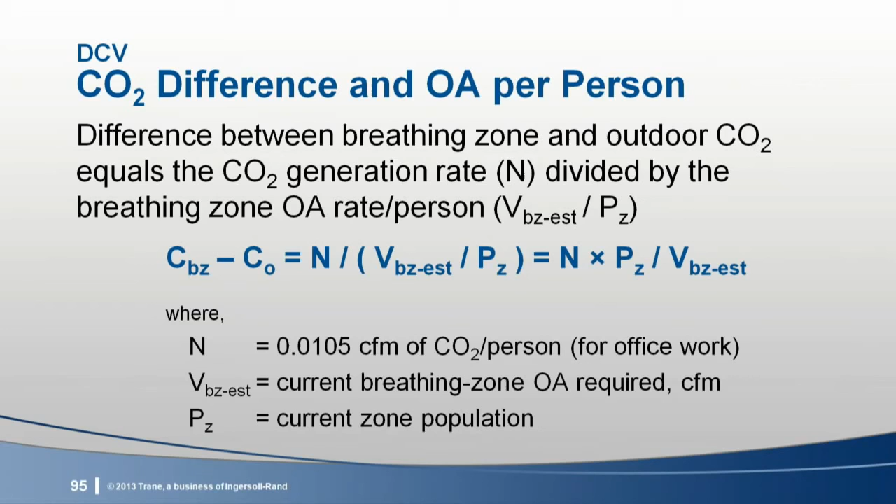For single zone systems and for 100% outdoor air systems with modulated airflow, the difference between breathing zone CO2 and outdoor CO2 level at steady state equals the volumetric CO2 generation rate per person divided by the breathing zone outdoor airflow per person. Typical adults engaged in routine office work generate CO2 at a rate of about 0.0105 CFM per person. Both population and required outdoor airflow rate are unknown, but they are related by the CO2 generation rate.

So a simple controller based on this relationship can be used to estimate the current breathing zone outdoor airflow required based on the difference between zone and outdoor air CO2 levels. We can design a controller for each demand control zone as follows.

Let's consider a 1,000 square foot lecture classroom with a peak population of 65 occupants. A proportional controller, like the one shown in the 62.1 user's manual, can be designed by simply finding the breathing zone outdoor airflow required at peak population and at zero population.

This example zone needs 550 CFM of outdoor air when all 65 people are present, but it only needs 60 CFM when the zone is unoccupied, but the ventilation system is still operating. We use the steady-state CO2 equation to find that differential CO2 at peak population rises to 1,240 parts per million, but drops to zero at zero population.

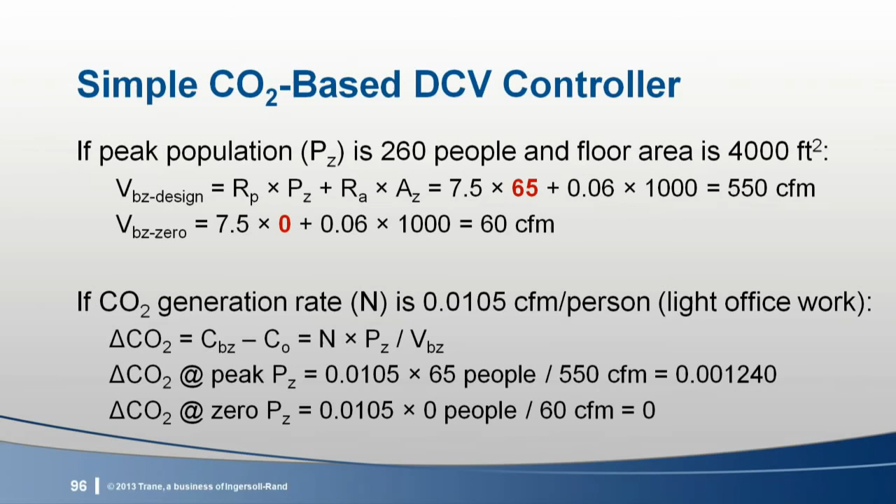These values define the endpoints for a simple proportional controller. The controller itself is simply a straight line between these two points.

As population changes, differential CO2 changes, and the controller indicates a corresponding change in estimated breathing zone outdoor airflow. This corresponds to a change in required outdoor air intake flow for both single zone systems and demand control zones in 100% outdoor air systems, and it can be used to modulate outdoor air dampers directly in those systems.

Modulating the outdoor air damper changes the differential CO2 level and estimated outdoor airflow rate. The controller uses the new CO2 difference to modulate the outdoor air damper until the outdoor air rate balances with the sensed CO2 difference. The population is still unknown, but the estimated intake airflow equals or exceeds the minimum outdoor airflow rate actually required in the breathing zone.

The bibliography includes an ASHRAE journal article that describes several similar controller designs, and the 62.1 user's manual shows a proportional controller very similar to the one discussed here. We also covered this topic in the 2005 Engineers Newsletter Live broadcast that's listed in the bibliography.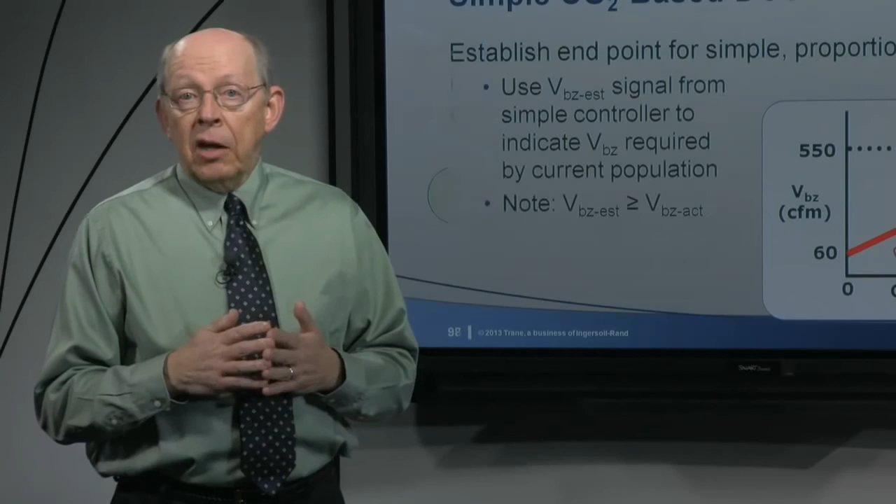Zone level demand control can be used in multiple zone systems too. In fact, to comply with energy standards, systems might need to provide both zone demand control and ventilation optimization control. We'll come back to zone level control in a minute.

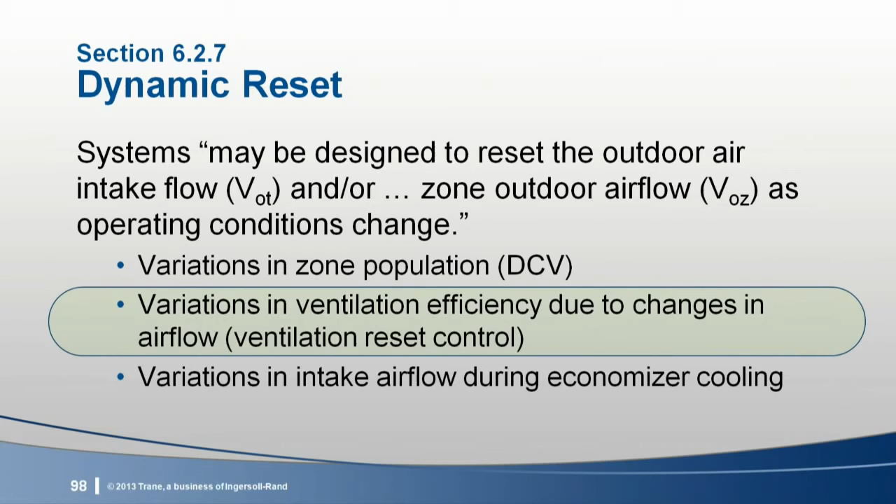First, let's discuss ventilation optimization control, which is one of the dynamic reset options specifically allowed by the standard. Used primarily in VAV systems, it's a strategy that recalculates system-level intake flow as system ventilation efficiency varies due to changes in zone airflow. A typical VAV system is designed to bring in at least the minimum intake airflow required for proper ventilation of the critical zone.

Remember, the critical ventilation zone needs the richest mixture of outdoor air in its primary airstream. In a properly designed system, all non-critical zones get excess outdoor air at design conditions. At any part load conditions, if design intake airflow is maintained, all zones, including the critical zone, are overventilated.

So Standard 62 permits the dynamic reset of outdoor air intake as operating conditions change without even considering population changes. Since each VAV controller knows its required outdoor airflow rate and senses its primary airflow, the building automation system can collect this zone information and solve the multiple zone system equations to find the current intake flow required.

This becomes the new set point for outdoor air intake flow at the air handler, and that is how ventilation optimization control works. We've discussed this dynamic reset option extensively in previous ENLs and in the ASHRAE journal articles listed in the bibliography, so we're not presenting details today.

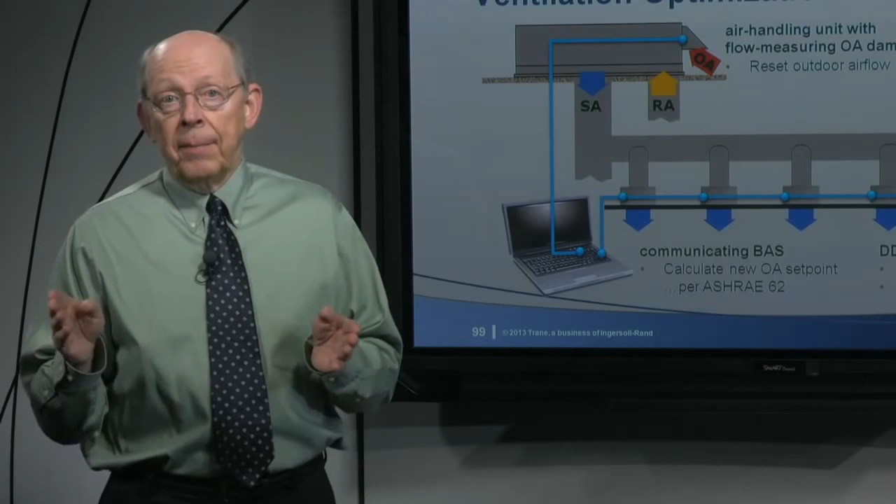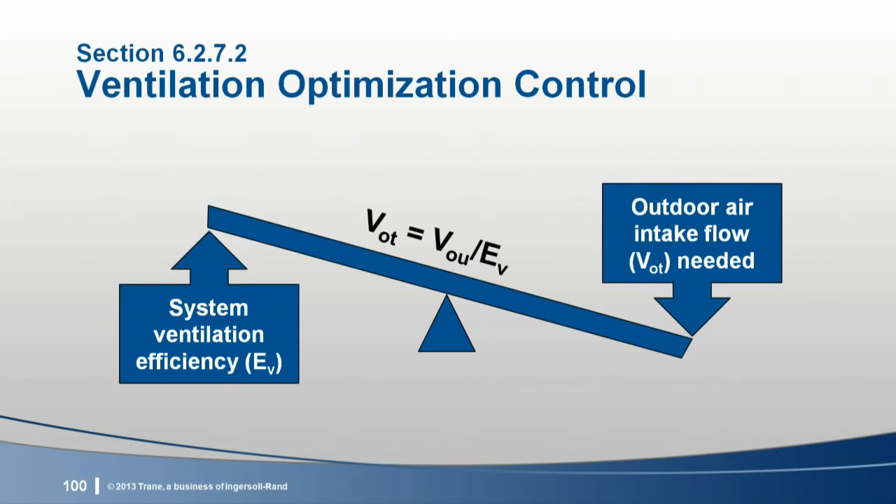In summary, VAV systems work like this. If designed for worst-case intake airflow, system ventilation efficiency always rises from its lowest value at design to higher and higher values as the zone primary airflows drop at part load. Efficiency rises because less unused outdoor air exhausts from the system. And since they are inversely proportional, as system ventilation efficiency rises, outdoor air intake flow drops.

Now, can zone level demand control be combined with ventilation optimization control? Of course. In fact, they must be combined in some cases to comply with energy standards. Here's how it can be done.

If some zones use a demand control approach to estimate population, such as time-of-day scheduling or occupancy sensors, it's pretty easy. Use design population in zones without demand control and estimated population in demand control zones to find estimated breathing zone outdoor airflow. Use measured primary airflow for each zone and the estimated breathing zone rate to find the outdoor air fraction. Then at the system level, using current information from the zones, solve the multiple zone system equations to find the outdoor air intake flow currently required.

But what if some of the demand control zones use CO2 sensors to estimate the required outdoor airflow rather than population? In this case, the design path changes a little. Use peak population in zones without demand control and use estimated population in demand control zones that estimate population.

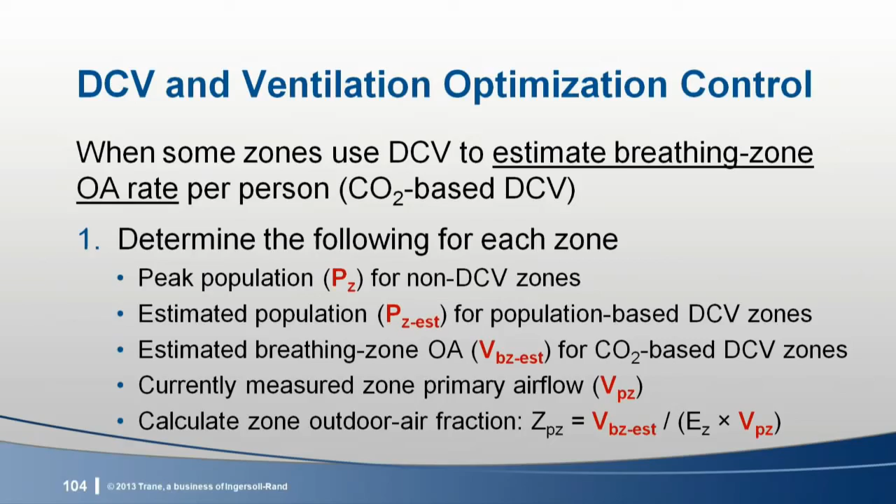Use estimated breathing zone outdoor airflow for CO2-based demand control zones, found based on sensed CO2 and the simple controller previously described. Note that using the simple controller for CO2-based demand control zones might result in some overventilation because in addition to CO2 from outdoors, the primary air also contains CO2 from people in all other zones in the system.

If you choose this approach, be sure to combine it with occupancy sensors in the demand control zones. That way, unoccupied zones with elevated CO2 levels won't be overventilated by mistake. As before, use these zone values to solve the multiple zone system equations for the current system outdoor air intake flow.

And finally, set an upper limit on intake airflow. Calculations based on estimates can't result in a current intake airflow that exceeds the design value. After all, cooling and heating capacity are based on design outdoor airflow rates.

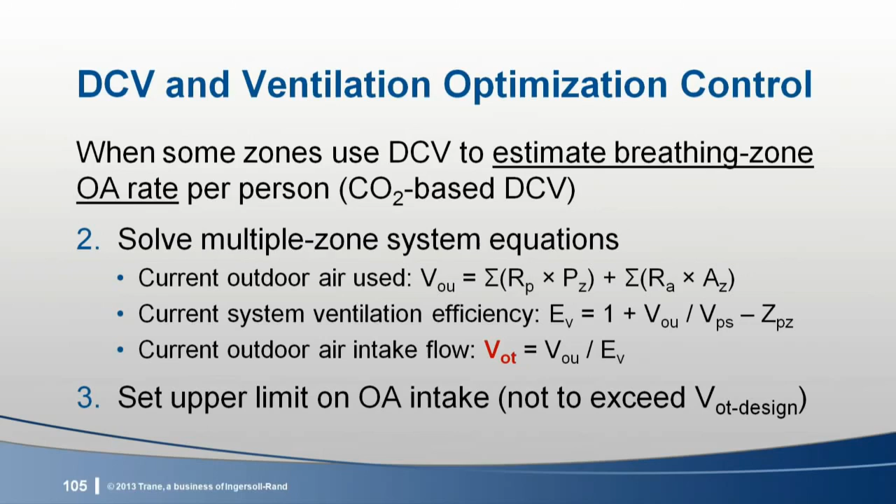The best approach for CO2-based DCV zones in VAV systems might require a CO2 sensor in both the breathing zone and the primary air supplied to the zone. ASHRAE research to study this is currently nearing completion, so watch for journal articles about it within the next year.

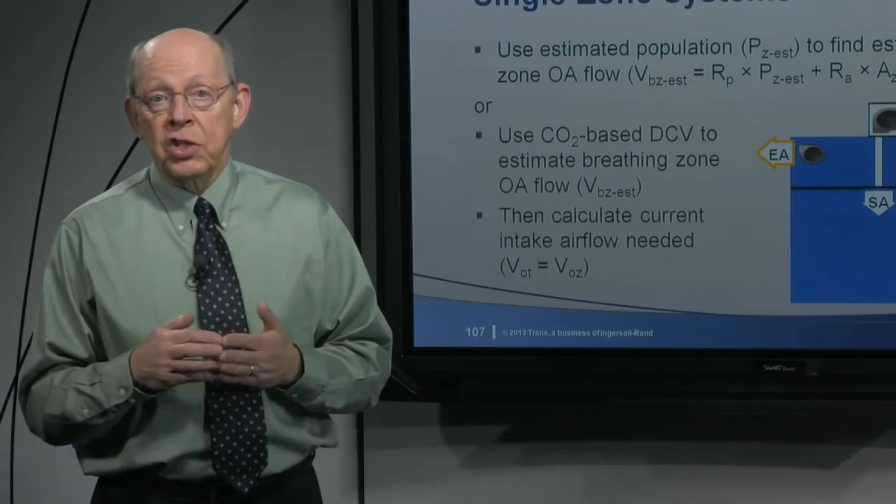To meet Standard 90.1 and Standard 189.1, high occupant density zones must include demand control in some form, regardless of the ventilation system type. Single zone systems can estimate population to calculate both the breathing zone and the required intake outdoor airflow, or they can use CO2-based controls to establish the breathing zone outdoor airflow and to calculate the required intake airflow.

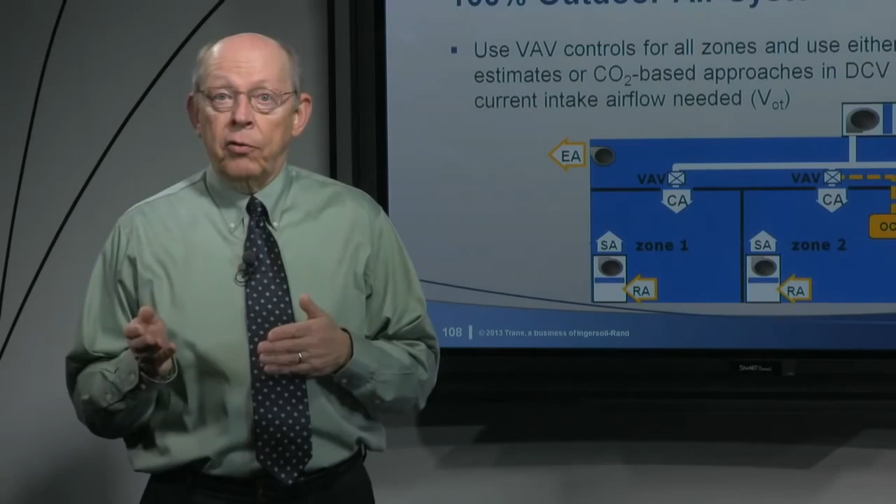Like single zone systems, demand control zones in 100% outdoor air systems can either estimate population and calculate zone outdoor airflow, or estimate breathing zone outdoor airflow using CO2. But the outdoor air distribution system must be VAV, and every zone in the system must include a pressure-independent VAV box to maintain proper outdoor airflow as the demand control zones modulate their outdoor airflow.

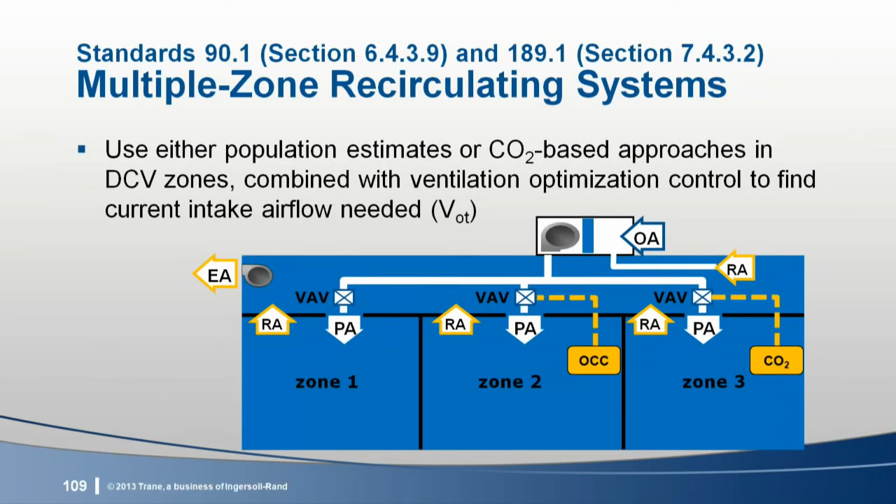Multiple zone systems are likely to be required to use ventilation optimization controls. In addition, they might be required to use demand control ventilation in densely occupied zones. Demand control can either estimate population and calculate breathing zone outdoor airflow, or estimate breathing zone outdoor airflow based on sensed CO2 level. In either case, the current outdoor air value for each demand control zone must be used by the ventilation optimization controls to find the current outdoor air intake flow required for the system.

Now, let me summarize dynamic reset. Some single zone systems must include demand control ventilation to meet energy standards. We know how to provide it, and it saves energy with minimal impact on first cost.

And if any zone in a 100% outdoor air system requires demand control to meet these standards, its outdoor airflow varies, so the air handler can't supply outdoor air at constant volume. The outdoor air supply must be VAV, and every zone in the system must include a pressure compensating VAV box to maintain proper outdoor airflow.

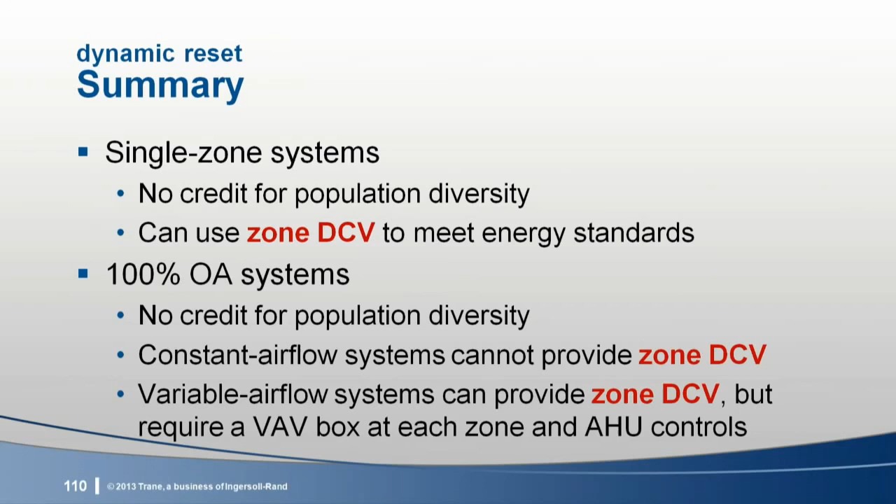We know how to do this too, and it saves energy, but it increases first cost. Remember, the standard doesn't allow population diversity credit in single zone or 100% outdoor air systems, so the equipment must be sized for worst case intake airflow, assuming each zone is at peak population, whether the system includes demand control zones or not.

I know it's pretty bad when a quick summary takes 2 slides, but multiple zone system designs account for system population diversity, which saves first cost.

They may include dynamic reset at the zone or system level to meet standard 62.1, but they must include ventilation optimization control to meet standard 90.1. And if any zone in the system requires demand control ventilation to meet the energy standard, local demand control ventilation can be combined with ventilation optimization control. The result is a multiple zone system with zone level demand control that really works.

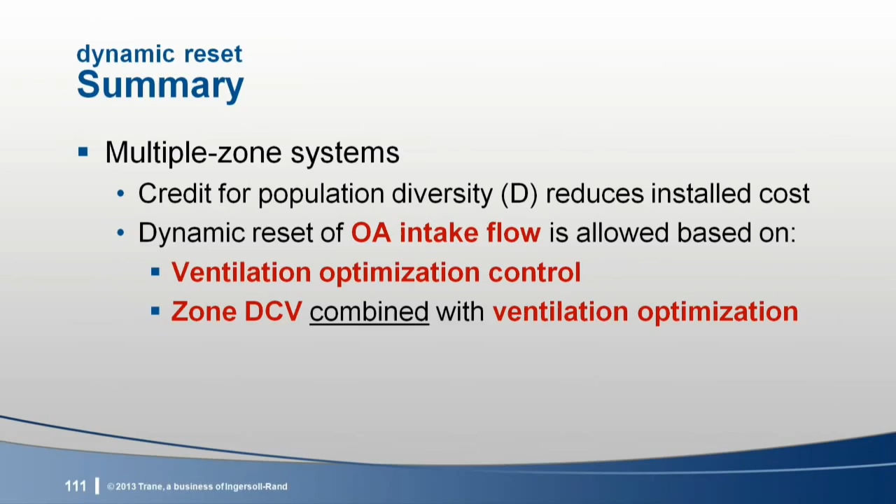That's it. Well, we hope you learned a lot about ASHRAE Standard 62.1 today.